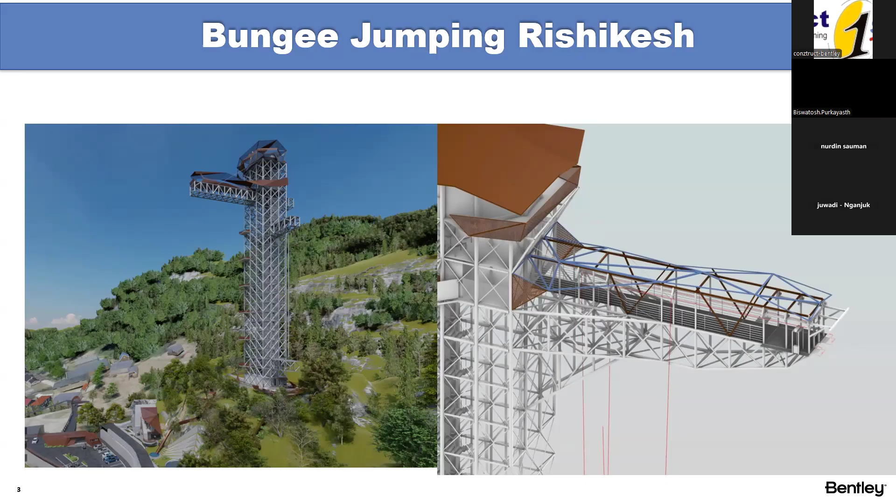So we have so many challenges. Actually we didn't do it directly, but our consultant did, and we always try to advocate and guide them on how to deal with this.

Now you can see here, it's a tall structure having a boom length of around 27 meters, and the drop height is more than 100 meters. It was supposed to withstand extreme climatic conditions.

So our skeleton consultants undertook this project. They used our product, STAAD. Now when I say STAAD, it's not only about STAAD, it's with the Structural WorkSuite. What is that? I'll come to that a bit later.

So what did it do? It's mostly steel. You can see some of the bases here - these are small little foundations or stubby columns. But as I mentioned, it's a super tall structure subjected to extreme climatic conditions, including extreme wind load. So it was modeled with normal steel structure and with pre-tension cable.

And in this boom, this hoisting or mounting passenger cabin was supposed to move around. So a lot of things were considered. First of all, advanced cable analysis was performed. In addition, moving load, which moves all across this portion, was also modeled. Okay, so this is just a project overview.

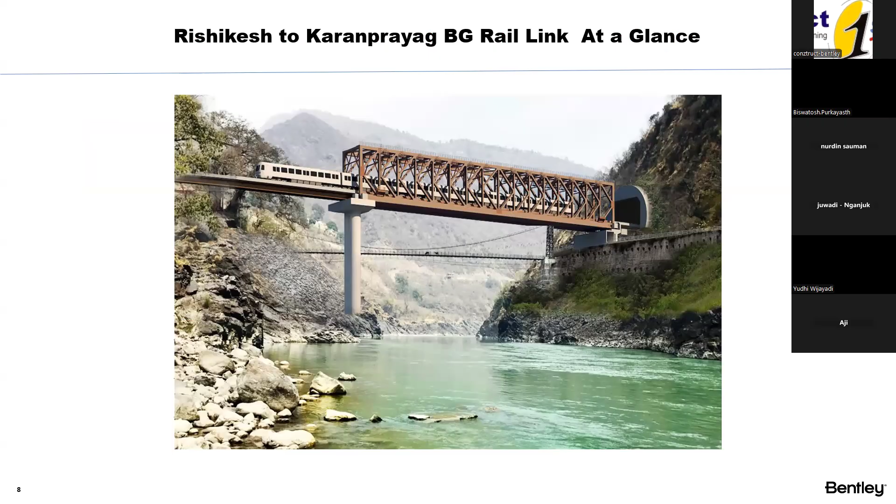So we instead have something called scenario optioneering, by which there could be different types of arrangement for a bridge or any kind of building. Now what you do is open different models separately, analyze them separately, and compare them to see which one would be the most optimum.

So you might be wondering, instead there is something called run cloud analysis. Have you ever come across this? Did you see while you open STAAD, normal analysis, there is something called cloud analysis? Now, cloud analysis is a kind of dedicated analysis. We need to have a separate service for this.

The benefit here is you can run multiple types of geometric arrangement, and you needn't perform the parallel computing in your own machine. In the cloud, you can ask for multi-parallel computation, and you can get all the different design parameters like utilization ratio, steel takeoff, and so on, so that eventually you can compare them and see which one would be best suited for you.

But this is kind of a separate service you need to take. They have used this for different optioneering scenarios, because there could be different kinds of arrangements. So yes, in the cloud, it would be a much smarter and faster way to quickly select the most optimum one.

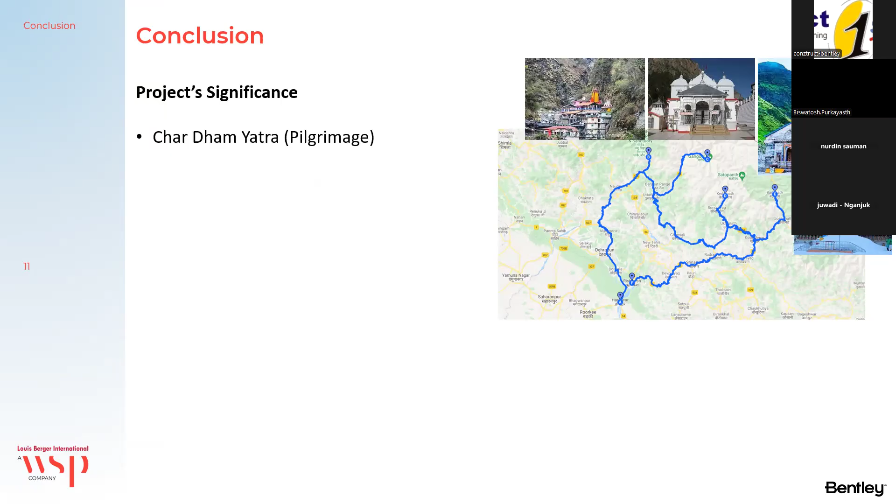It's not like we are selecting some heavy sections and we are done with this. It has to be saving a lot of resources. So yes, these are the project outcomes. If you go to even Google Maps, you can see this is a very rugged terrain, beautiful site though. But yes, building the train track is a very challenging task.

So yes, we have a different set of train tracks built over there, and it helped provide a lot of employment to the local community, as you can see. So yes, how we achieve this optimized design by STAAD, saving significant man hours, critical assessment in the construction stage by incremental launching - this is the project outcome that we have.

And this is one of the biggest success stories. If you go to our Bentley website, you can also see there we have a lot of detailed discussion on this, because this is one of the winners among our projects.

So anyway, let's go into our structural part. So right now we call it the structural work suite. So how many of you have heard of this structural work suite, by the way, or are using the structural work suite? Anyone?

Structural work suite - are you using it, sir? Or at any point of time have you come across it? What is it? Is it a product? Is it a solution? Is it a license? What is it? Anyone?

So every one of you have heard of STAAD Pro, right? At any point of time, even if you have not used it, you have heard of STAAD, right? STAAD is a kind of, we all know that it's a structural analysis and design product. But let's see what we can do.

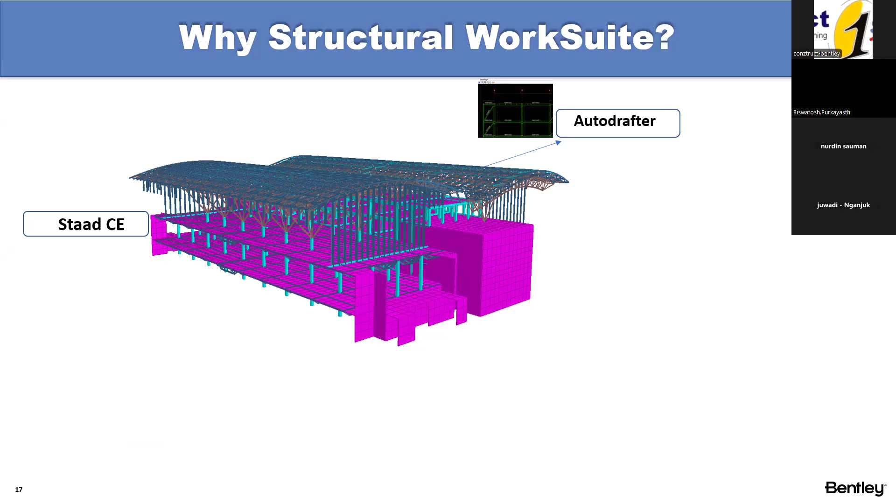So we are done with the steel member design and detailing. What next? Member design is done - is that enough for your steel structure? We need to establish connection design, right? We are good with the member design, but what if the connection fails? That is the reason we need to have some solution for connection design, and we have something called RAM Connection here.

So yes, steel part is almost done. Next, concrete, right? Now for concrete, I have a question for you. How are you dealing with it in STAAD? Because this is a very tricky question - in every session or webinar or seminar I go to, they have a lot of questions about which approach they should use. So is anyone using STAAD for concrete design, by the way? No one? Detailing of the concrete? No, designing.

Detailing will come later on. For designing, we are often using STAAD Pro for building concrete, along with RCDC, Advanced Concrete Design. Then the design which is already inbuilt in STAAD - concrete design, like design column, design beam. Okay, that's a good part.

There is a discussion on this, so I'll just explain - there's a reason I've asked this question, and this is not my question. I have been going to so many places and every user asks this tricky question. I'll come to that, why I've asked this question.

We have something called RCDC or Advanced Concrete Design. If you're in an industrial structure, this will not be that effective for things like pipe racks. If you're in a building structure, it would be very effective. Why is it so? I'm coming to that. For flat slab, post-tension slab, normal slab, hybrid slab, we have RAM Concept, and finally STAAD Foundation.

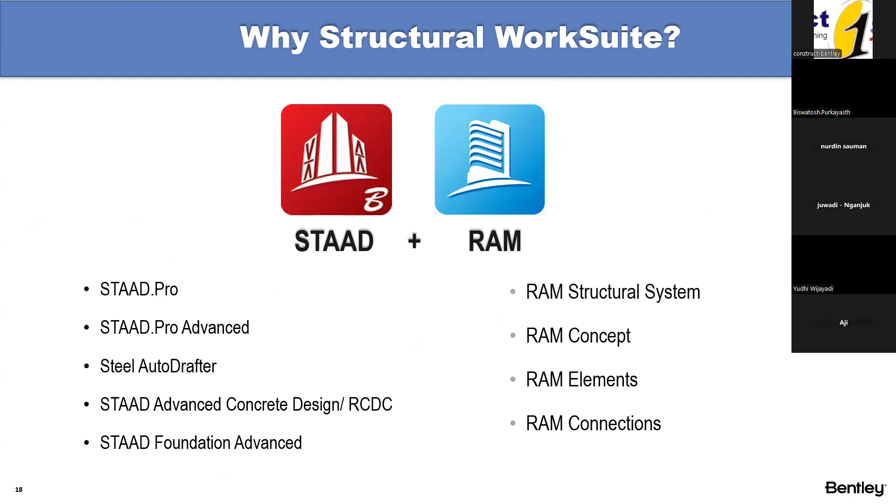So under Structural Work Suite we have this set of programs - many structural solutions apart from STAAD. You'll get all of them under this single license. Any question? Okay.

Those who are new to STAAD, let me give you some differentiators. First of all, it's a time-tested product, not something developed overnight - it's been around for 24, 25 years. It has got the input editor. I think everyone is aware of this, right? Input editor in STAAD - if not, let me give you some idea.

Input editor is another approach to control different modeling or analysis instructions through command prompts and different syntax. For example, if you want to apply a partial moment release to a set of members, you needn't select the members graphically. You can select the member from the input editor, define the member number, and define something like MP 0.99 or 0.95, and everything will be automatically assigned to all the defined members.

Not yet - you've heard of it, right? Did you ever hear of OpenSTAAD? Never used it, right? If you want any separate training on OpenSTAAD, please let me know. I also work a little bit on OpenSTAAD because it's more about programming.

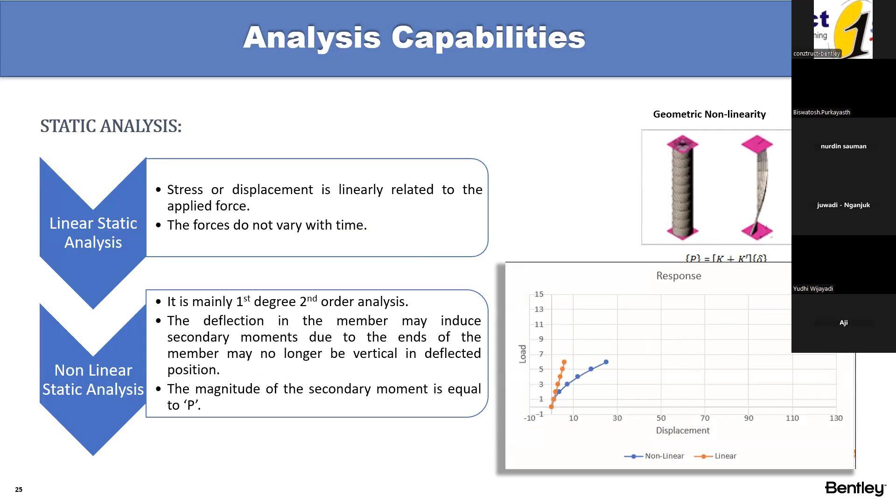If you're doing dynamic analysis, we have different options like response spectrum and time history. Response spectrum is mostly for seismic precision design, which is a code-based approach. For dynamic analysis, we handle different scenarios - it could be forced, unforced, periodic, or non-periodic.

For example, you want to do machine foundation analysis, blast analysis, earthquake analysis, footfall analysis, and so on. There are different types of solvers we have to attain all those different requirements. So this is the summary of the analysis capabilities.

Now, in your day-to-day life, which type of analysis do you need? Just let me know - in your structure or in your project.

Nonlinear? Geometric nonlinear, right? And how about the dynamic analysis? Okay, now nonlinear, someone mentioned, right? So what type of nonlinear? It's a P-delta analysis, large deformation. Yes, that's nonlinear, right?

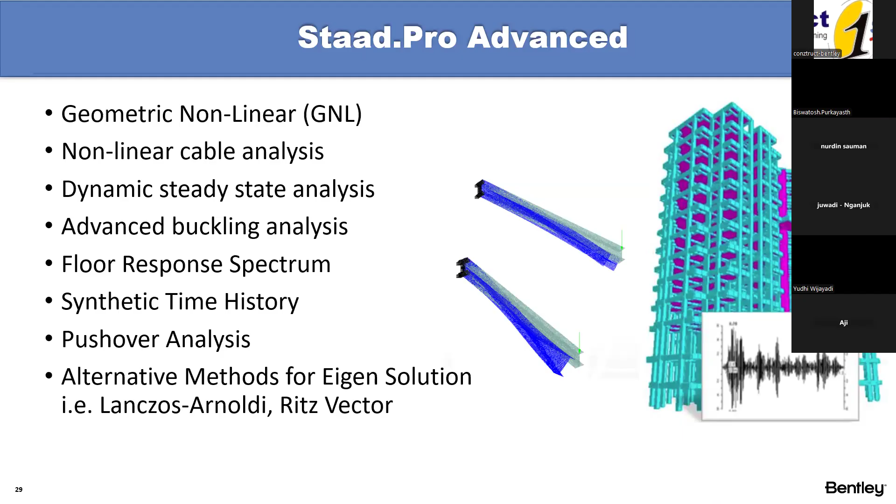So who has installed the latest one? I think some of you have installed 2023, right? So everyone has 2023?

No? Okay. Now, if you go to some old YouTube videos, a lot of YouTubers will show you with V8i. V8i is a much older version. Right now, from 2020 onwards, we have migrated to Connect Edition and then 2024. A lot of changes have been made.

So anyway, Connect Edition and all, most of you are aware of. Just to give you a quick differentiator here, it's a physical modeler-based approach, and the solver is a 64-bit solver. It has integration with ADINA, and all the international design codes are available. It has the steel auto-drafter, steel connection design, and advanced concrete design. There are a lot of other differentiators apart from that.

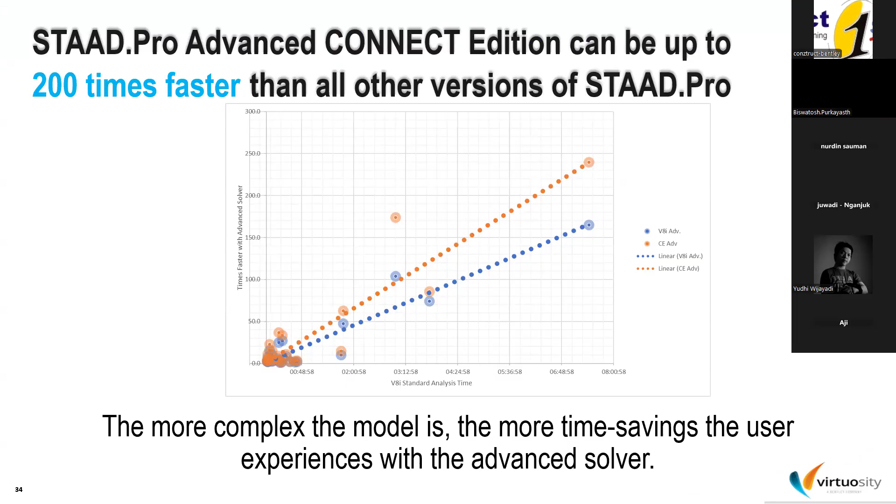iTwin Synchronizer is what we have - like BIM integration and all. This is the platform through which you can integrate with other products like Revit, Tekla Structures, and so on. Maybe after the end of this session, I can show a small video on this. But this is not a software, it's a small in-house application based on what we call digital twin, by which we can integrate between different products.

We can pull information - not only loading information or the sketch, but a lot of information like section sizes, material properties, release conditions, and so many other things. This is the interface connecting through the iTwin platform with STAAD, Open Building Designer, Revit Structure, SACS, AutoPipe, RAM Structural System, ProStructure, ProSteel, and so on. If you want to take a snapshot, you can take it.

Let me give you a quick workflow demonstration on this. So if you have open STAAD Pro, did you try this iTwin Synchronizer in STAAD? You have tried. From which product, import or export? Not analytical, meaning which other products like ProStructure, SACS, Revit? Only STAAD Pro to Revit. You have tried, right? Okay, fine.

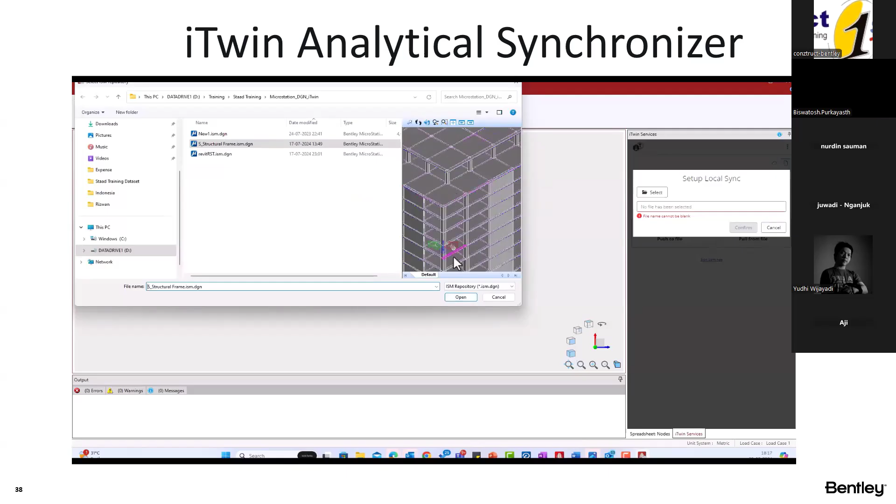For example, this is an Open Building Designer model, an architectural drawing, and I think this light is too strong. We can import the building. Let me just pull this a little bit. So you can see that this is an architectural drawing, right? This could be your building or industrial structure, anything.

I'm just showing it on this normal building structure, and it's a finite element model. Now this model, you can visualize, you can see everything in this iTwin Synchronizer, and you can just include or exclude any of the information you want to discard. This skyway view is very effective to quickly see if there is any clash or any kind of overlap, everything you can just visualize properly.

Once you are happy with that, after putting in that information, you can import it in STAAD Pro Physical Modeler. This is the physical modeler, and here you can see we have imported it, and it consists of all finite element information like meshing and everything. Let me just drag it a little bit, just to show you the mesh. It's a kind of very fine mesh. You can change the mesh density and everything.

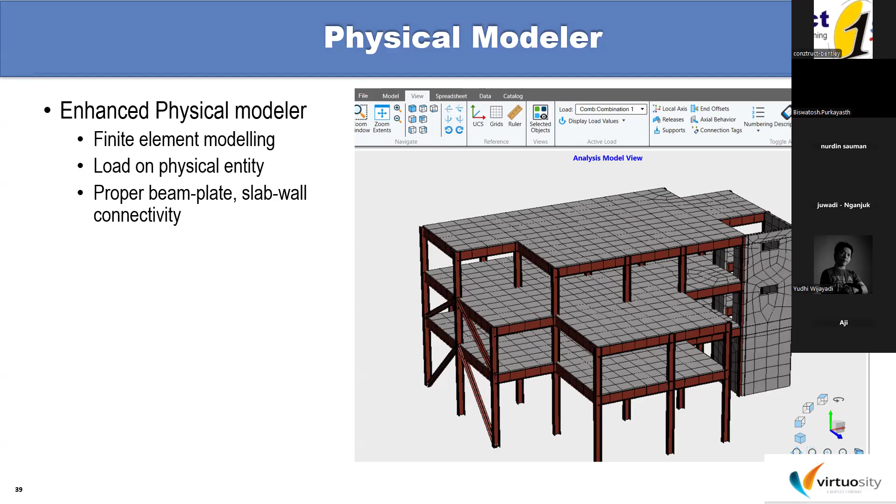So this is the chapter that we are coming to. Physical modeler is a very important feature that we have added in Connect Edition in 2020. Now a lot of users have been working on STAAD, but they don't use the physical modeler. Yes, it's absolutely optional, meaning you didn't have to use it, but it can help you to enhance your experience in modeling. So what exactly is the physical modeler? Let's see.

So this is the model we really see in our real life scenario. For example, this table, can we see any meshing, any nodes? Nothing. We see very continuous solid elements, right? Solid means a simple single element. But for the software, they don't use this one. They will need some analytical information like meshing, nodal information, connectivity information, and a lot of other things.

The point is, if we use the meshing in the normal approach, we can do it in the normal analytical modeler, but there are a lot of different meshing standards and quality we need to ensure. First of all, the connectivity issues, mesh quality, it should have a very good aspect ratio, and all those connectivity and quality issues will take a lot of time for an engineer to generate this. So that is the reason if you model it in a platform where you just need to define, for example, this table, I can define all the 4 corner nodes and thickness. And if there is any column or beam, the program would internally generate and establish the connection. How about it? It would be a wonderful experience, right?

So we can model it in how we see it in the physical sense. That's the reason we call it the physical modeler. It will generate the analytical modeler like this. You can see all those meshed footings generated in the analytical modeler. You also know that in the analytical modeler we have mat foundation, plate mat and so on, plate mesh, everything we can do there, but you can leverage the power of the physical modeler for quickly modeling this.

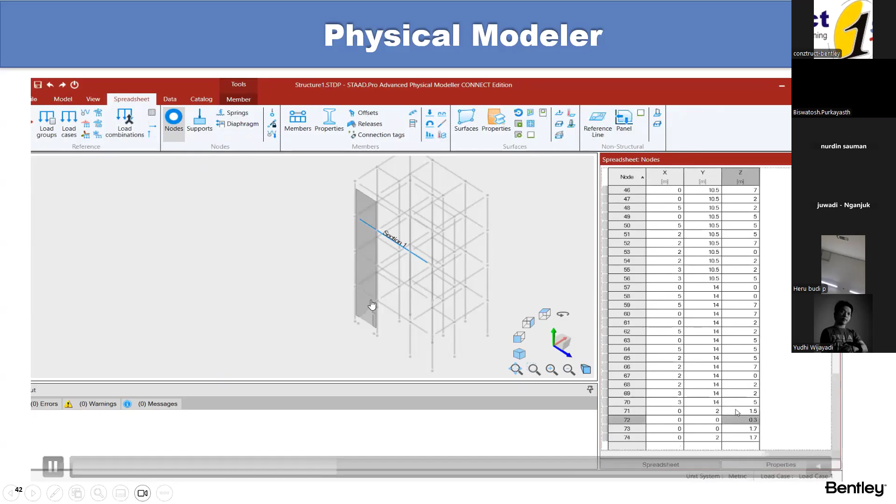For example, here this is a building, and we have some opening. This is modeled in the physical modeler. All of a sudden, imagine my client says, change the shape of this opening from rectangle to triangle. Now if I had already meshed it the normal way like in the analytical modeler, I would have to delete everything. But instead, we can go back to our table in the physical modeler, change the basic dimension, just the corner dimension, and reduce it to a triangle - triangle isn't practical, but just for this explanation I've shown this.

And if I come to the analytical modeler, you can see the mesh and everything is automatically adjusted. So I didn't have to delete anything, I didn't have to recreate anything. That's the beauty of the physical modeler, especially if you're working with a fine mesh model. Any question?

Can we set the mesh, not the parametric model, but square meshing? Square meshing here? Yes - not square exactly, these are all quadrilateral, and wherever required you can see small little squares are created. It's not square, it's quadrilateral meshing. Because this is a triangle, right? If I have to model it as a square, at certain points it has to change its orientation and insert some triangles. That's why it automatically reorients and adjusts. So why do you need the square or rectangular meshing? For designing? Yes, for designing it within STAAD Pro. Yes, I know this is the common reason, and that's why you didn't have to do that.

I'll show how you would design this with a square. First of all, obviously you're not going to make any triangle here, but if it is a rectangle, then obviously the program would automatically create it.

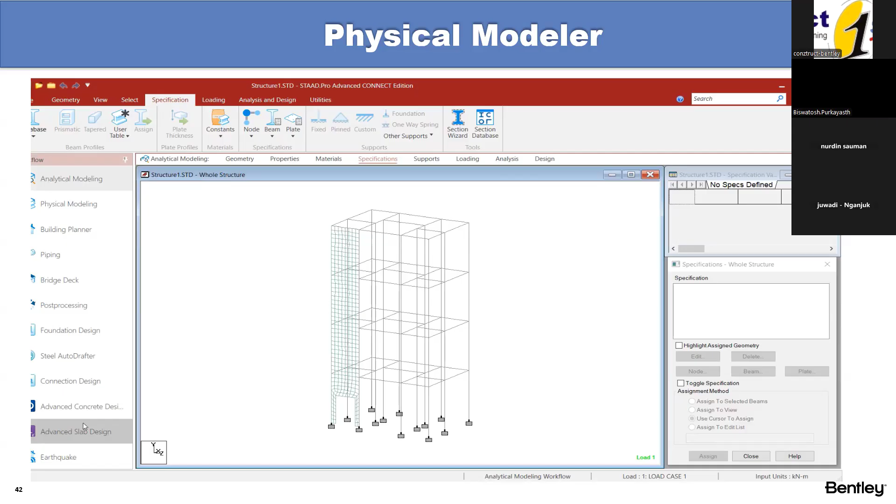Next, before I go into that, we have seismic options for the building industry. We have response spectrum and time history analysis capabilities. STAAD is a very big chapter, and in 3 hours it's difficult to cover every detail, so just know that we have a very advanced response spectrum analysis feature and time history analysis by which you can simulate any kind of dynamic behavior of the structure.

Calculation of base shear in STAAD is a common question. You can take a snapshot because you won't find it in our help manual. A lot of users come back saying their base shear is not matching their expectation. You need to see that these 4 parameters are properly calculated, then you can assert it. Take this snapshot because it's very helpful for dynamic analysis of the building. When I was in support, many users doing building analysis found the base shear is 0. Why? We noticed that mass participation might be very small, and spectral acceleration for that mode is very low. So we need to check that all these factors are within the expected range.

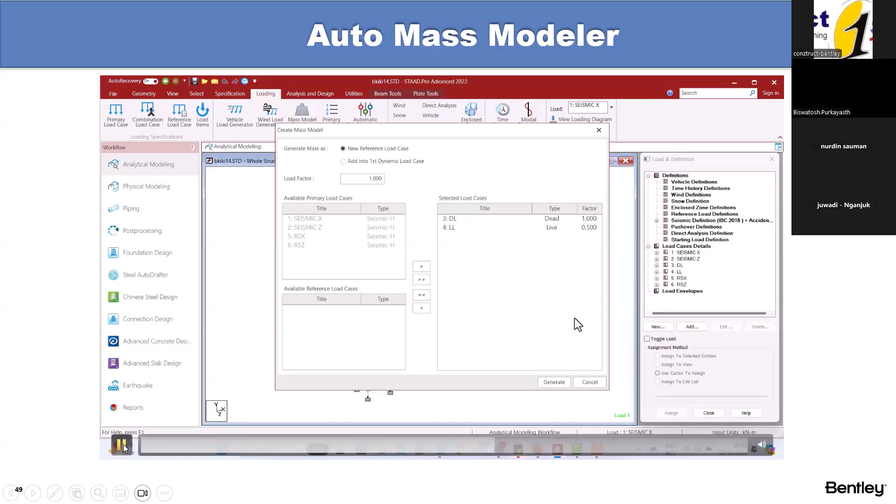You can see on the right side, everything was automatically created by the program. I've taken a very small model for this, but if it's a huge model, it will take a long time if you go by the normal procedure.

Some advanced dynamic analysis — Ritz analysis. I'm not going into detailed discussion of this, but just asking, are you using this in any other software? In your industrial structures, if you're doing dynamic analysis, you might need to use it in some cases. This would be very helpful, especially for pipelines and similar structures if you're doing dynamic analysis.

Say, for example, there is a normal building, and you have modeled some mounting structure here, maybe for a stand, modeling pipes or a steel antenna and things like this. Now what happens if the structure is very complex? There are some elements that are not as stiff compared to the main structure. When you vibrate it, those antennas will flutter just like a flag on a pole. You might wonder, I'm doing the dynamic analysis and can't remove it, but you might want to model it as part of, for example, a mezzanine floor. Now your entire structure is very stiff, but that connected component is not as stiff.

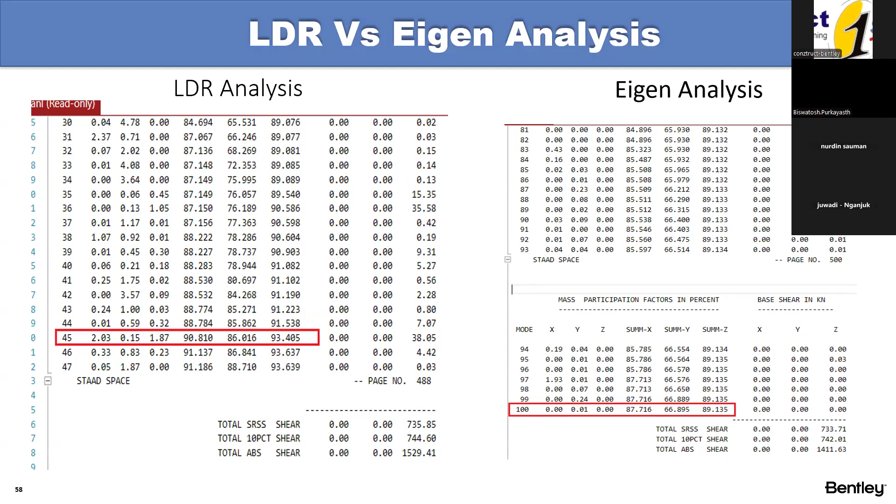So this is just to tell you, this is not a class on dynamics or anything, because we have to cover a lot of things, just to give you a differentiating feature. If you have any question, you can ask me.

Response spectrum. Anyone of you aware of this? Do you want me to discuss this a little bit? Do you need to use it? Why? By the way, any other software, do you have this response spectrum? By the way, you have it, right? Now he has worked on this.

So what happens? Just to give you some idea, in the response spectrum analysis, after you perform the eigen solution for every mode you are solving, we get the eigen frequency and everything. Now, responses of every mode are fetched from this response spectrum curve, depending on the natural time period of that particular mode.

Now, there is something called combination method, CQC method, SRSS method. These are basically something like this, if I want to show something. The resultant would be R1 square plus R2 square plus R3 square. CQC also has some expression where square is involved. R means the responses, it could be reaction, it could be displacement, it could be forces.

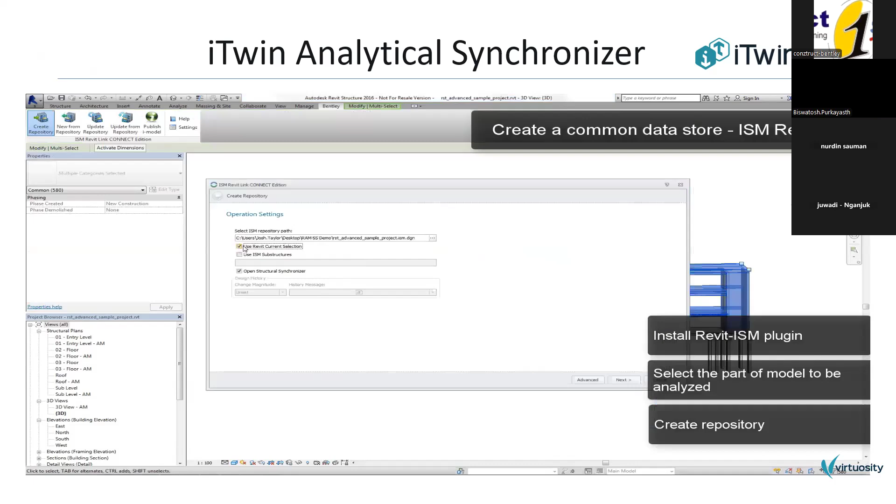But the interface, once we bring it into ISM, from there on we do have control. Previously I did have Revit, but after all we didn't have any Autodesk license, so we had to follow IT instructions. This is for RAM structural system. Let me see if I have something similar on STAAD.

If it is STAAD, let me see. Yeah, I think it is on STAAD. Let me show you the workflow and see if it's sufficing your requirement or not. This is Autodesk Revit, okay? I can share this video with you - at this point you can further revisit this entire process. So let me play this.

It's a long process, I'll skip it a little bit. It's a Revit interface - you can see all those joints and everything you're asking about. You can find it in this video. As I don't have Revit, I can't open it and show you, but I have recorded it before. Every step is recorded here.

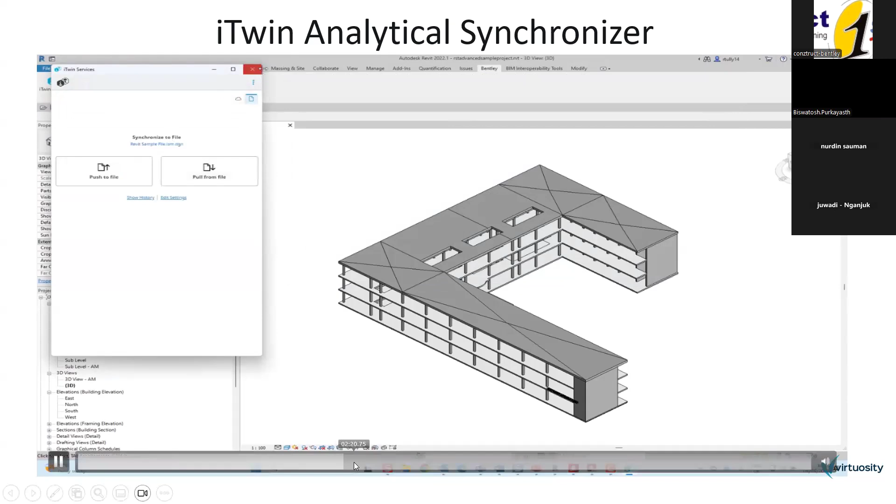Long videos, yeah. This is iTwin in STAAD. This is how we have imported it in STAAD.Pro in the physical model. In the physical modeler, you can make changes like mesh density and everything. Further, you can take it - there also you can make some changes in this ISM modeler. A lot of things - if you want to discard or include something, you can do this.

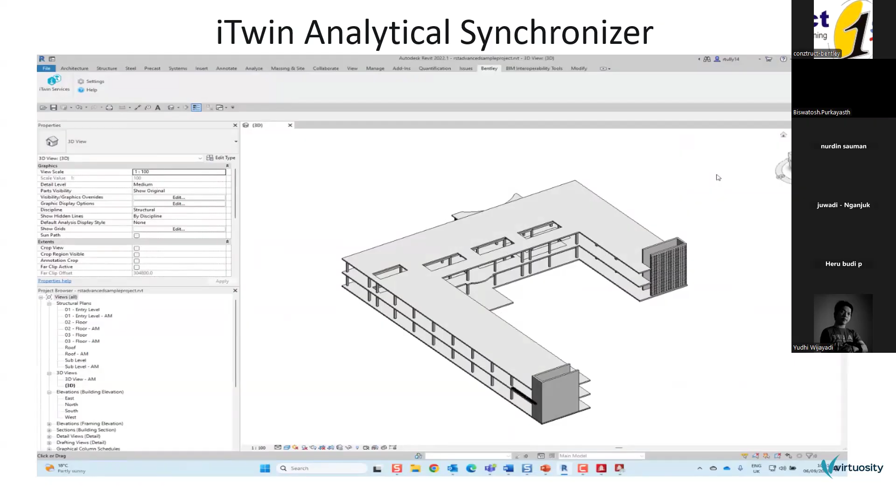It's a long video, around 5 minutes, the entire process we have discussed. Maybe I can share it so you can see each and every step, which may give you some better insight. So this is the entire work. I have also shown that if you want to make changes in STAAD and again take it to Revit, you can also do it. So it's two-way traffic. Please remind me after this, I will share these kinds of things.

There is another example I had from Revit to STAAD. We had a Revit license, after that we discarded the Autodesk license because of some IT compliance. Okay, I'll share this information with you. You can get all the information.

Okay, now can you take a break? Then we'll come with some live model presentation, maybe quickly with the building and then the steel. Okay, how much time do we have? 1.5 hours, can it be?

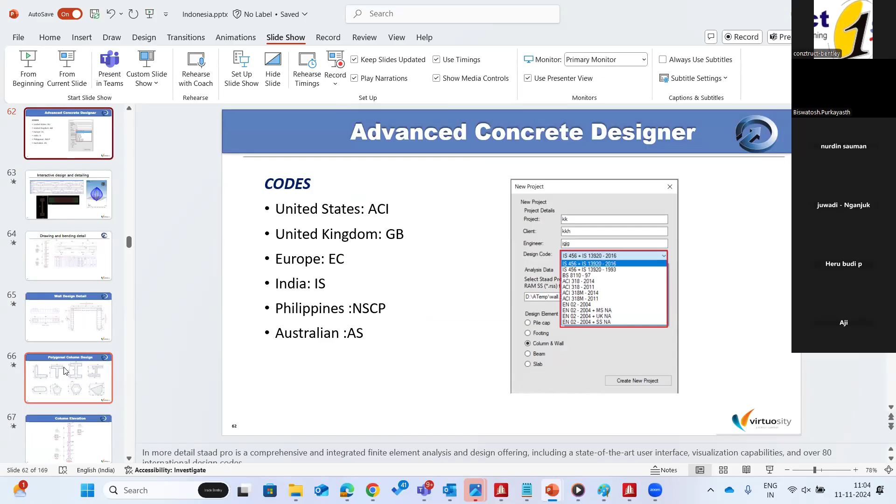No, after that, let me finish this. And just call it start.

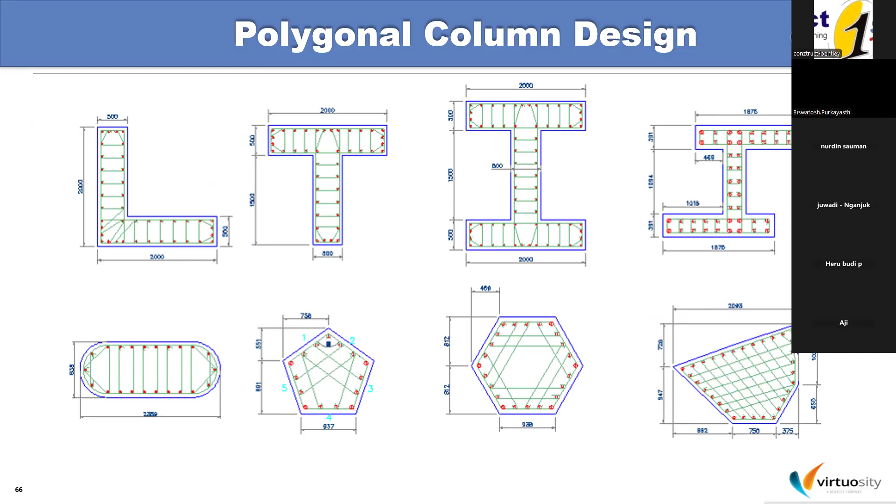And this is the column design, you can see the detailing. Believe me, these detailings are very rich, maintaining the proper lap length, height, distance, spacing, all those zones, everything is well detailed. Even for the beam, you can see the detailing after designing, very rich.

I think why can't we hide this? I don't know. Or how to hide this.

Anyway, this is a bar bending schedule. This is also a very painful task. After you design, you need to generate the bar bending schedule like cutting length and all, right? So we have this product which will also generate the bar bending schedule, including the cutting length and all. Those who are from the concrete industry, especially building, will find it very useful.

Slab and staircase, we can design. And the reports and BOQ, the bill of quantities.

Okay, now let me open a quick model for you. Let me see if I can have this. For steel structures, I'll come later after this.

So this is in STAAD, right? Now, someone has asked the question that they have used a physical modeler, and while they have come to the analytical modeler, you got some error message. I don't know the error message that you got. First of all, let me discuss this, then I will come to that. Just hold on.

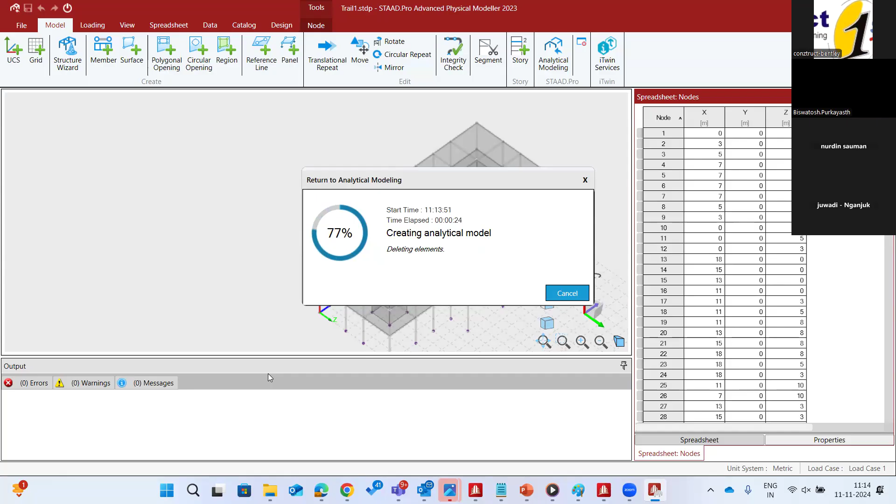If I go to analytical modeler, hold on.

So you can see this time I have reduced my mesh. As mentioned, structured mesh will, if our core location is good, form a well shape.

Now, in many situations, if you come back to the analytical modeler and want to make changes from here, you can see something is grayed out. You can't add anything, so don't get panicked here. Okay.

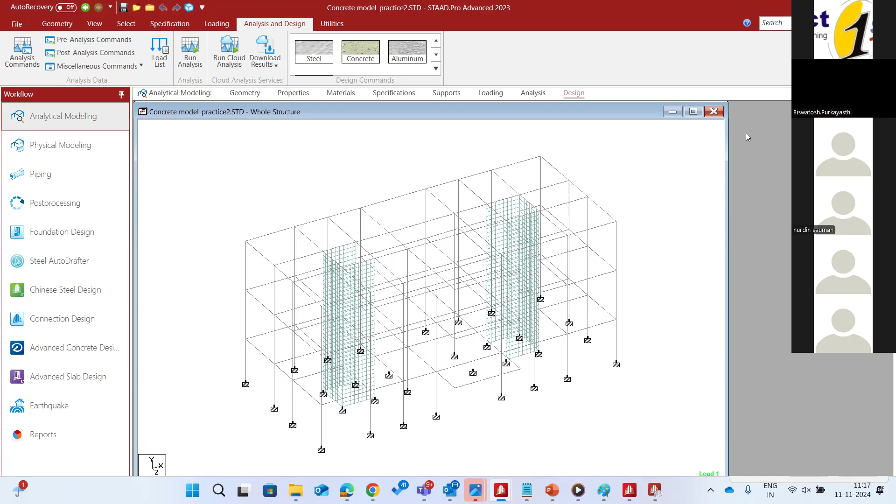we show this while you generate a mesh from here. I'm not going to add, I want to tamper this.

Or else you would find it kind of difficult making RCDC recognize this vertical wall as a shear wall, and you would wonder why RCDC could not identify those shear walls. The reason being, either if you're working directly in the analytical model, all defined as a shear wall.

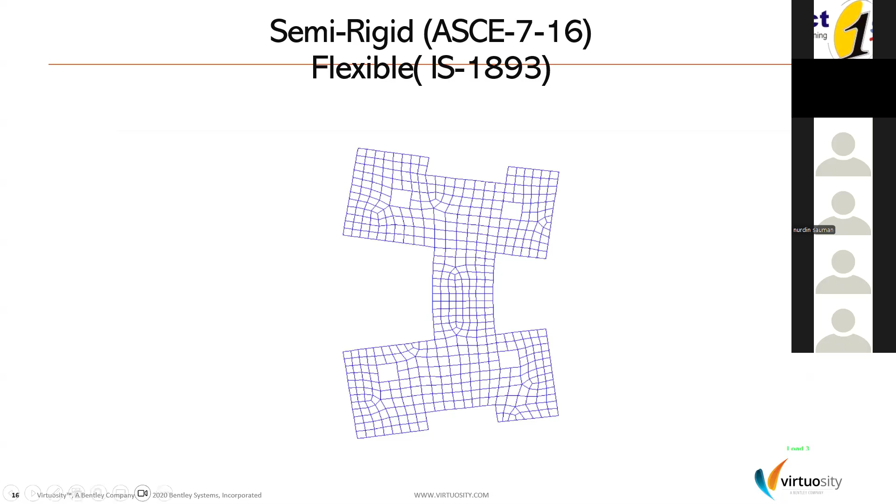There are some kinds of demonstrations or specifications they have defined for flexible diaphragms, which doesn't have any setback, and some span-to-depth ratio. There's some kind of guideline.

If there's no horizontal irregularity, there's another condition, and you need to just make sure that the maximum deflection should not be more than 2 times the average. Then only can you consider it a rigid diaphragm per code, and accordingly determine whether it falls into rigid or not rigid diaphragm category.

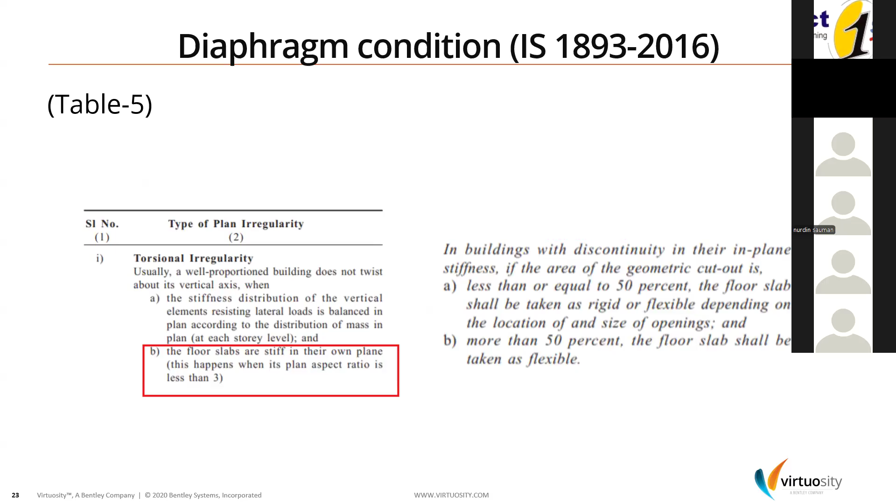I'm stuck right now. Another reason would be this one: you can see this open structure. You can't use a rigid floor diaphragm here, because this will undergo in-plane deformation.

Even if there is a cutout which has significant span, you should use it carefully, since it can undergo in-plane deformation. Also, another disadvantage is if there is a bracing like this, you can't get any forces in these horizontal bracings. And if it is a transfer condition, that means the load is directly falling on the slab, not on the column -- so obviously, how do you distribute the load?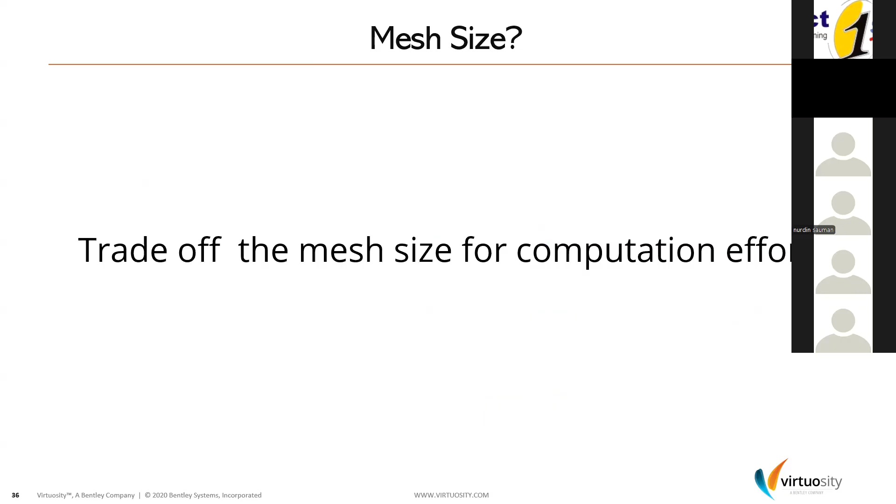So in a nutshell, the million dollar question is, shall I go for a rigid diaphragm or not? And to understand that, the meshing -- if you are not defining the rigid diaphragm, that means you have to use the plate element and mesh it, which needs a huge computational effort.

So the conclusion is, the semi-rigid diaphragm is the realistic and most accurate way to capture the behavior of any diaphragm, irrespective of requirement. On the other hand, rigid and flexible diaphragms are two extreme conditions which are assumed to be faster and numerically stable for computation performance. So eventually, use your engineering judgment by assessing the benefit and the effort involved in modeling, and the analysis time, to determine when it qualifies for rigid or semi-rigid.

There's a detailed webinar on this -- I've just gone through the overview, some case studies, and some modeling I've already discussed. I can send you the link if you want. So depending on that, you can model it without elements.

Also note, please, that if it's for that, as I have not modeled the physical slab here, I define the diaphragm by defining the diaphragm height. I just define the height of the floor. The diaphragm has been assigned here, at all those levels.

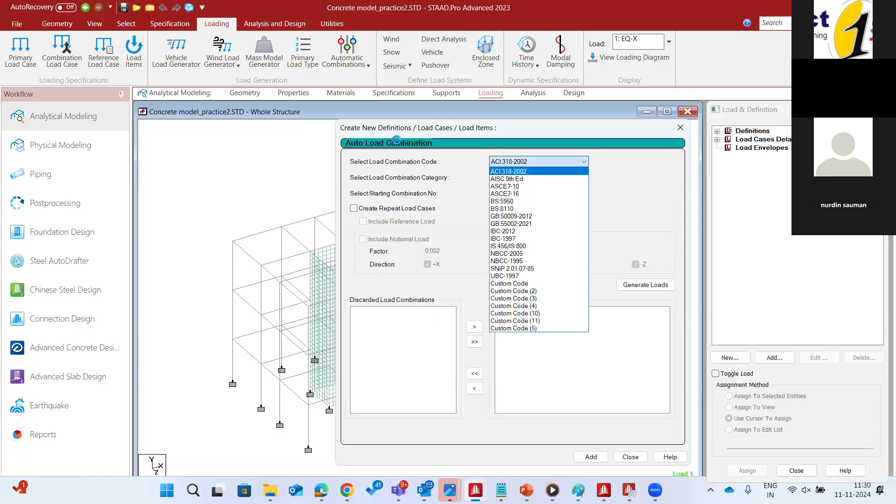Next time, whenever you use load combination, custom codes should be generated. So if you want to generate something, you can see 1.7. All those factors that you have generated, the template will be available. Can you please show the code? This combination load can...

Because this is a very powerful feature, a lot of things, as we have mass modeler, automated load combination generator can enhance your quick modeling workflow. Say, for example, you are working with 10 primary load cases, it could be like you have 50 combinations. There's a lot of chance that you might manually mistake defining the vectors, sign convention, and it is a bit time consuming.

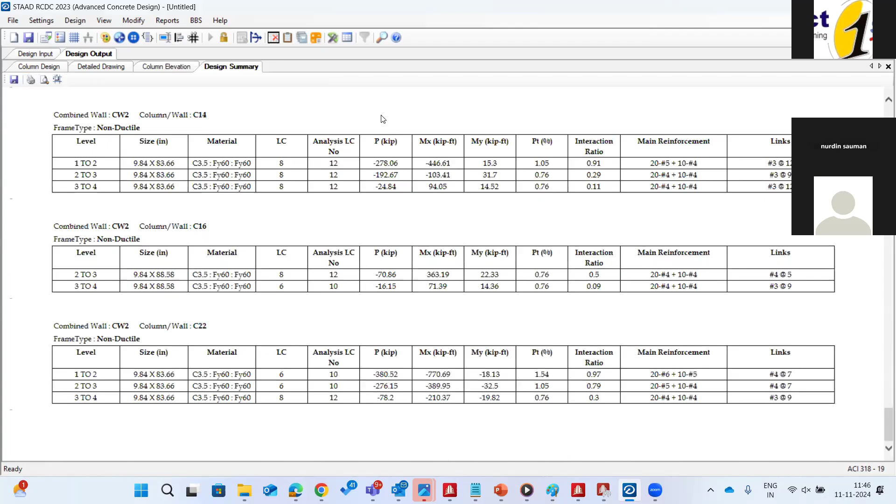And then design summary, the complete calculation if you want. Then if you want the detailed calculation, I'm not firing all of them, it will take a lot of time to generate those pages. Better I open one of them.

Okay, and finally, you can see the failure diagnostic. If any of the members are failed, you can see reason would be shown. The clauses, if there is any, it will report you. Bar bending schedule is also a very powerful feature we have. You can do all the detailing and drawing settings, like what things you want to include in this drawing and everything, very detailed product for design and detailing.

Even for, believe me, this RCDC can also open the ETABS file before we acquired it, because it was used by ETABS users and STAAD users also, because of this designing detail. Right now, I think ETABS is no longer supported. This is the bar bending schedules and cutting length and all.

Okay, so this is just a quick overview of RCDC, and similar way you can do the same for beam design. One thing just to add, even if you're doing the beam design, even if you are modeling with plate elements, if those beams are broken, you can still design them. Sure, right. Okay.

So this is the one. Now let me go to steel design, okay? Quickly, because I have another half an hour. Break at 12 o'clock, okay, give me another half an hour. A big subject, how can I cover all those things in this limited time? If I want to discuss some of the interesting parts, it will take a full day session. One full hour for concrete. Even one full hour is not enough, because RCDC will take another four hours. So anyway, it depends on the discussion depth we need.

Okay, in steel it's very interesting though. By the way, is anyone of you using partial moment release? Yes, you're using it. You too, obviously, partial moment release. So any axis, partial moment value, that is. Normally in the longitudinal direction we will release. All full release or partial moment release? Full release, or you don't use the partial moment release? I agree, okay, okay, I'll come to a few of these things.

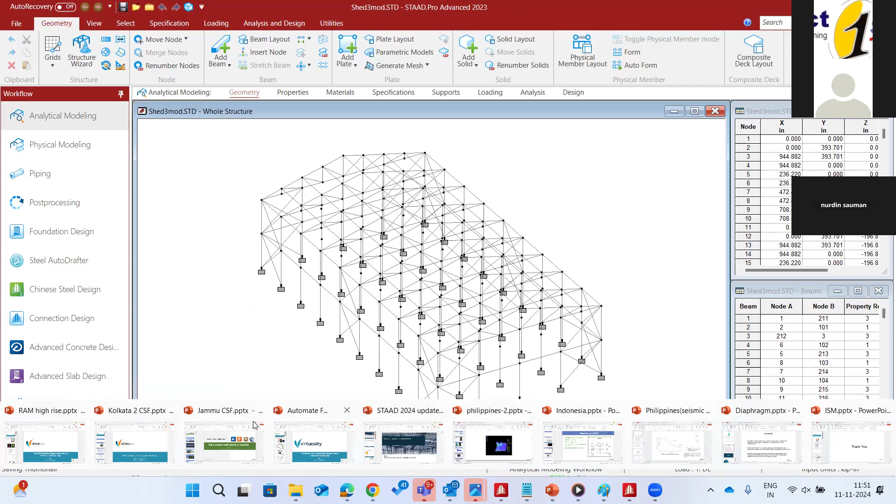Steel, none of you - sorry, one. How many of you are using the steel structure? Okay, let me open one list then. Just I'm touching upon a few of the important things.

So your steel section could be of different types. It could be built up, it could be cold formed, it could be any arbitrary shape. In 2020-24, we have replaced this section wizard with the shape editor. Are you aware of this, by the way? Tapered section - these are some of the arbitrary sections.

Now let me go through a few of the things. So it could be a very simple hot roll section or any build-up section made with the hot roll. It could be a build-up from plate elements like web tapered, or maybe some arbitrary shape which is designed not like a hot roll steel. So all those things are possible to model and perform the analysis, but we need to understand a few of the things before we jump into the conclusion.

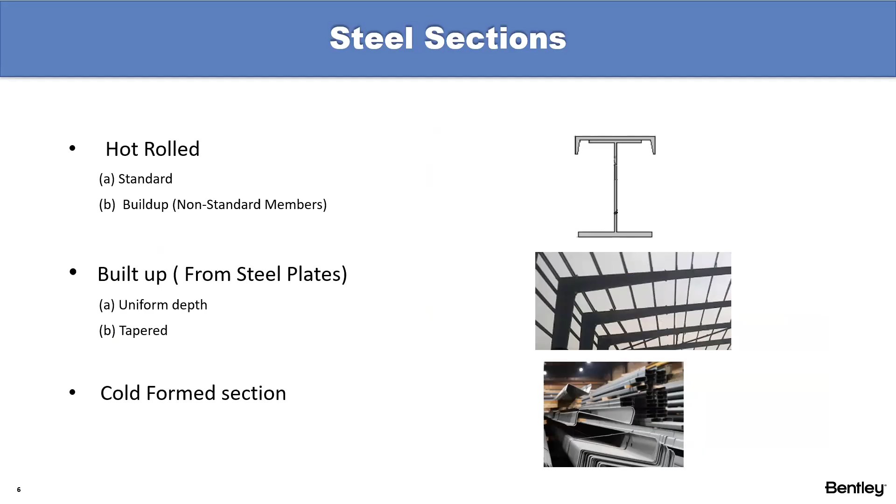Different ways to model the steel section - I'm just still in the steel sections, okay? So those who are into other products, not comparing with other products, every product has got its own unique merits and demerits. Just to let you know, in steel, as we mentioned, we have been here for a long time now. It has got an enormous amount of options to model different shapes. For example, any arbitrary shape you have, for example, this one.

It could be steel or it could be aluminum extrusion, anything, right? There is something called section wizard or shape editor by which you can model any kind of arbitrary shape. If it is in a DXF format, you can import it, you can assign it, and you can analyze it. Anyone of you using this arbitrary section, by the way? No need? Okay, just to let you know, anyway.

And if you're into the factory shed, like where you have the web tapered section, you can model the web tapered section and we can also design them.

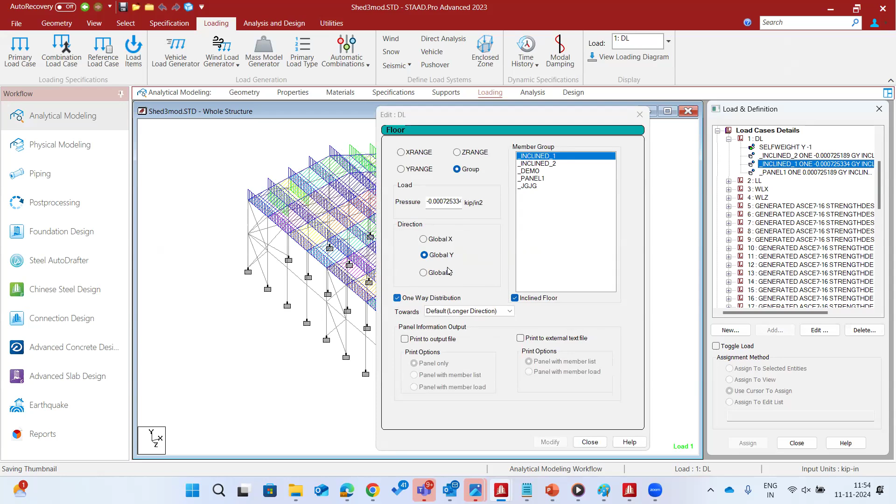Anyway, let me go to now the structure where we are. So this is a simple structure, but we are discussing a few things here - dead load by the group load. We have used a one-way flow load because steel roofing is directly sitting on the purlin, so there is no point in defining the two-way floor load. There is an option called inclined floor and one-way floor, and I have applied the group load. The group option is nothing - you need to define this floor panel by any group name. And while defining the floor load, the group name would be automatically visible. You need to just assign them.

Anyway, we have live load. For wind load, we have a very dedicated feature to define it. We have both features: the normal manual way of defining wind load, and also codal approaches. This is generated by the manual approach, where we define intensity versus height information. Or if you want to select any code, the codal procedure would be used to generate the wind load.

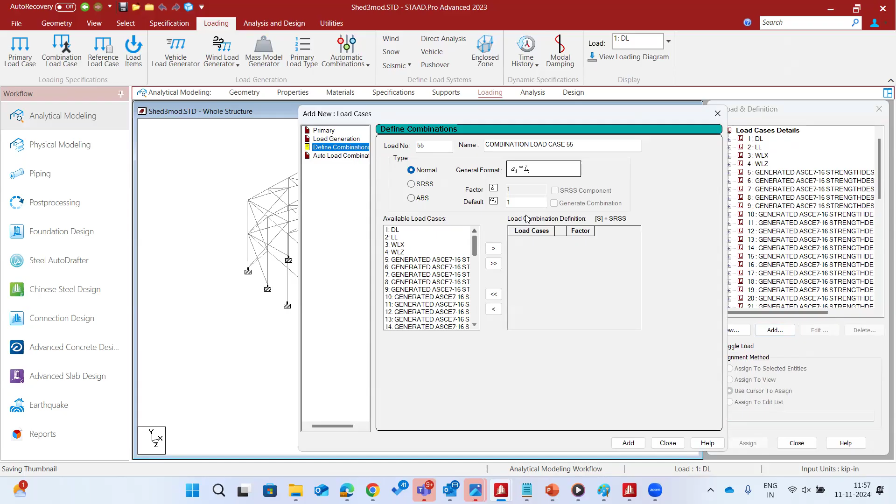Yes, he's close to that, but the point is, if there is any tension only, or compression only, or P-delta, we can't use the load combination directly. The reason being, these are nonlinear states. Tension only, we have to iterate to converge this problem. But if the model has got P-delta analysis, direct analysis, tension only member, compression only member - these are nonlinear analysis. And if we do the load combination, what it does is simply pick up the result from the primary load cases and algebraically sum them up. You get my point? Okay, let me go here.

This is important because in some cases, for example, you are using tension only, or maybe mat foundation. I have seen a lot of users using the normal combination, and they come back to us saying they are getting very misleading results. What to do, I'll come to that later on.

Say, for example, if I have this guy here, and you have applied a load P1, and the displacement may be D1. In a second instance, P2, and displacement is D2. Now, if I want to see the combined effect of P1 plus P2, what would be the displacement of this?

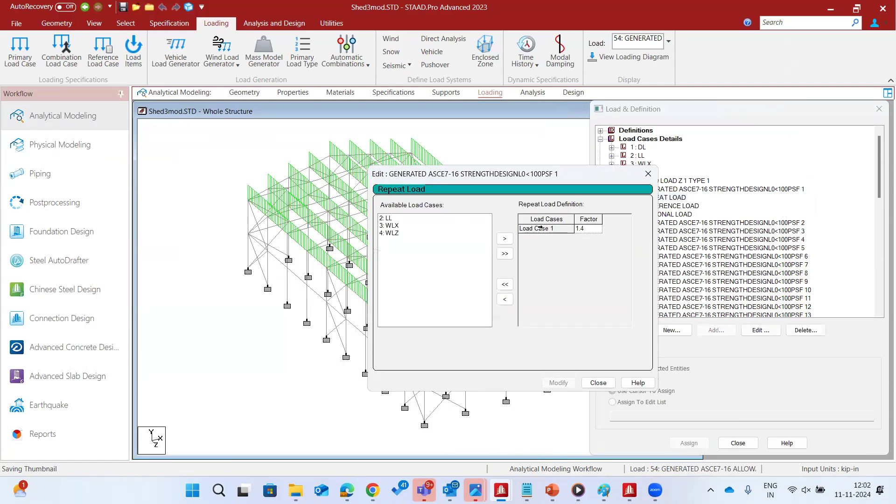Repeat load - as he mentioned, I think he tried to mention this, repeat load. The repeat load is similar to this load combination. There also you can pull the basic load cases, define its factor, but it will create a new load case. That's the reason all the combined effect that you can see here, I have already created them. These are all shown by small letter L rather than C, that means this is basically a load case itself, and within that the combined effects are already included wherever required. So if you use the repeat load case, a new load vector will be created and solved, so even if it is non-linear, you'll get the exact result.

So let me show you a very interesting thing. If I have this, let me see if I can show this. Any question on this, by the way?

Now you should consider this because tension only, compression only, you have to model it at certain point of time, be it member or the soil support. And soil has compression only property, right? So it is again non-linear. Now in a structure, there will be wind load plus gravity load. If you use the normal combination option, your structure might give you a very misleading result.

Let's see this one. This is one of the examples I have taken. So here you can see this is the lateral load, gravity load. And what is the support condition I have defined? Plate mat, compression only spring. Now again, it is a non-linear state.

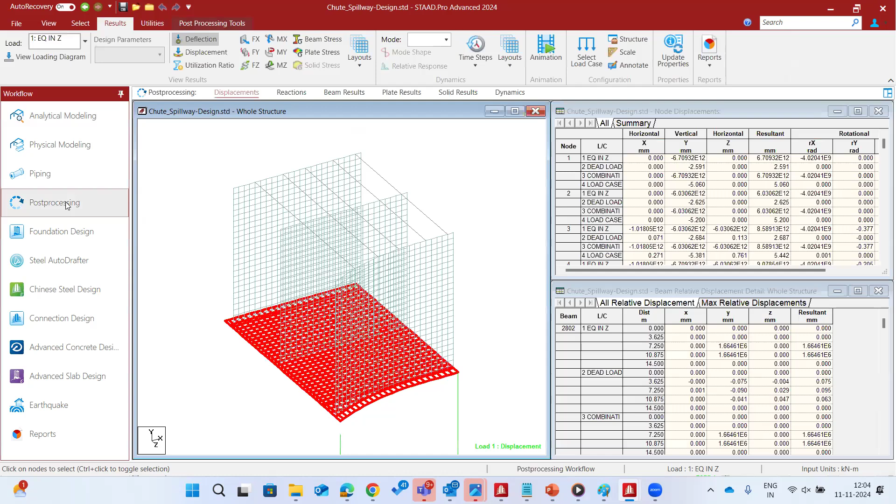Now if I use the normal combination, say for example, if I use the normal combination... I have a terrible bad throat. So you can see the normal combination, I am having the displacement of something infinitely high, e to the power 12. The reason being, there is nothing to stabilize because this is a non-linear state.

As for the first load case, earthquake load, it is like load without any gravity, and I have a compression only spring, meaning something which can only take the compression and can't resist any kind of uplift. Say, for example, a very light, maybe styrofoam-like thing, if you apply the wind it will topple like this, because there is nothing to stabilize it, no gravity load. It has got a gravity load, but imagine there is no gravity load, it will topple like this, right?

That is the reason for the first load case, you are getting unexpectedly high displacement. It's fine, we are not working with the primary load case, we are working with the combined effect. For the gravity load, it's fine. But whenever we are using the combined effect, still we are getting so much of high displacement, which should not happen. The reason being, it is a misleading result because it algebraically adds both the results. Okay, now let's see how to overcome this.

We have used this one, the fourth one, as a repeat load case, where we have used the same first two load cases. We have pulled together whatever factors we want to include, and we have performed this analysis. Now in the repeat load case, you can see that we are getting a very decent result, because it is actually solving the combined effect by creating a new load vector rather than blindly taking those primary load responses and algebraically solving them. So remember this - if you design with the normal combination, maybe you are getting a lot of misleading results for this. Anyway.

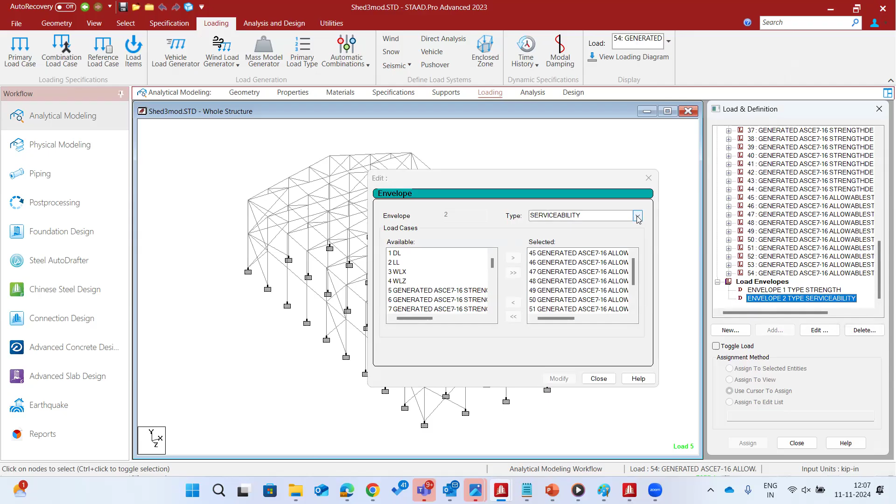And please note that we have the load envelope, I don't know if you are using it or not. There is a very good feature in STAAD, even if you are in industrial structure it is very required - that within the same parameter block, you can ask for both the serviceability and the strength limit state check. What you need to do is define this envelope definition. These are the load cases for the strength limit state, and these are the load combinations for the serviceability limit state. Because in the serviceability limit state, you are not factoring, mostly. So you can ask the program to include this, and once you've done it, the program would automatically check both states.

Now I have performed the analysis. Time is limited, or else I could have explained a little bit more on this partial moment. If you have any question on partial moment, please, you may ask. Okay, now let's perform the analysis.

So steel designing in progress. Now, in the steel design, you can see something like effective length factor, which we have included in the 2023 version. Anyone can say what it is for, or has anyone used this before? Effective length factor.

If you're in steel design at a certain point of time, you very sure need this. LY, LZ, or you can say the factor is KY, KZ. So what factor do you take? Default member length, or the KY value of 1? Or you calculate it, considering the distance between, say, columns.

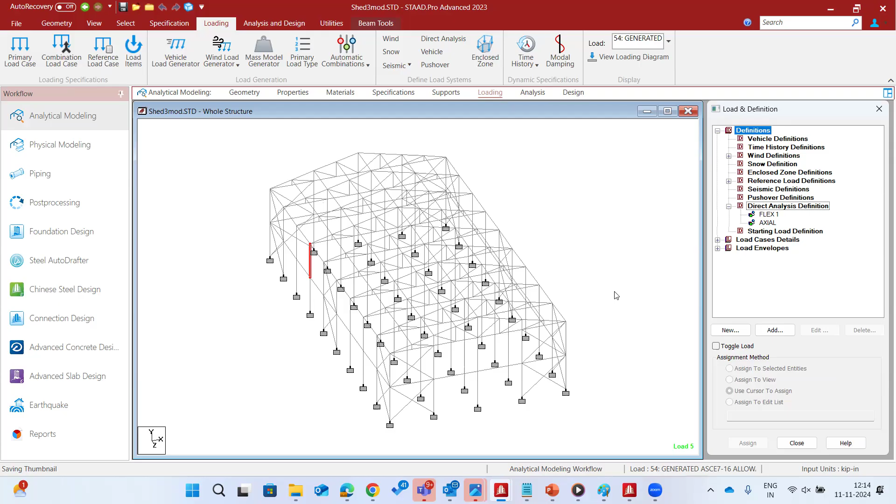But yes, we have got this. If you do this, then you needn't have to calculate the K factor - you can keep the K factor of 1. But if you want to ignore it, it's up to you. So even if you ignore it, we have recently added this effective length calculator. If you click on this, you can select the member from the list or the group.

If you want to quickly generate it, it will calculate the K factor for you, so you needn't calculate all of this manually following this nomogram. It has an inbuilt calculator because a lot of users were requesting us to include this calculation.

Okay, one more thing we have. Can you give me 5 minutes just to show you this optimization feature? This is very important, and very interesting as well. Let me go to it first.

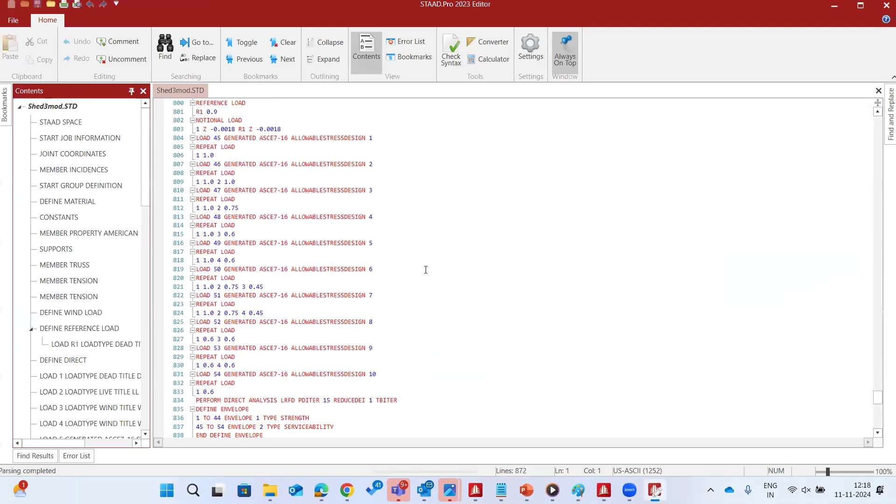Now let's see what we can do using the select command. I have already included this in this example. Before coming to that, I created this model just to show you. So instead of the check code command, I am using the select command.

Now if I run the model... Now please see here, if I run the model this time and show you this same utilization ratio table, you can see here all of them have passed.

This is my actual section, 18 by 35, and it has picked this one. For this one, it has picked a different section. That means, if I double click on this, this is my actual section 18 by 35, and this is the design section - the most optimum section it has picked, 12 by 26.

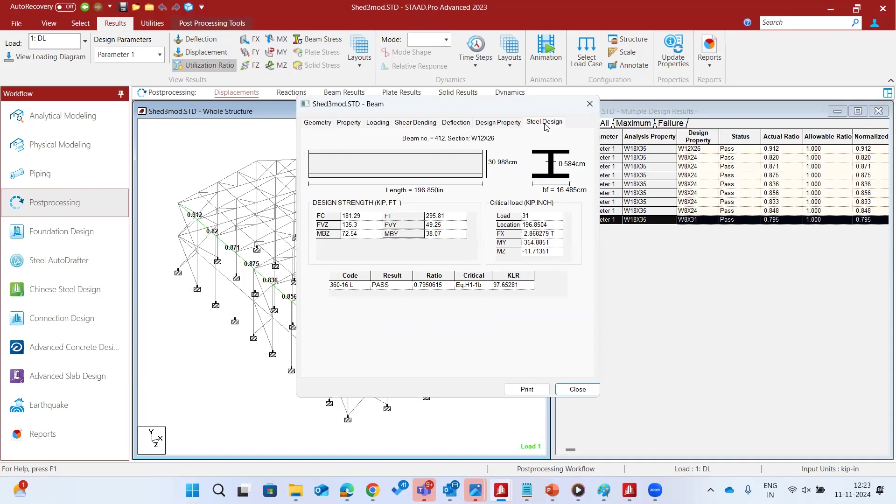Now you can put it, but again, as I mentioned before in the concrete part, is there something we need to do more after this? Because we have made a lot of changes in the section, right? We have to reanalyze it, so the stiffness is changed. So the best way is, after you have done this first set of design command, you just invoke a perform analysis command to reanalyze it. Just one step you need to do.

And you define another design parameter block. This time you needn't use the select parameter, just with the normal design ratios and other parameters, and conclude it by the check code parameter. Just to see the final design ratio with the updated demand, because we have changed the stiffness, and with that changed stiffness, we have reanalyzed, right?

Okay, let's rerun the model again. Hold on.

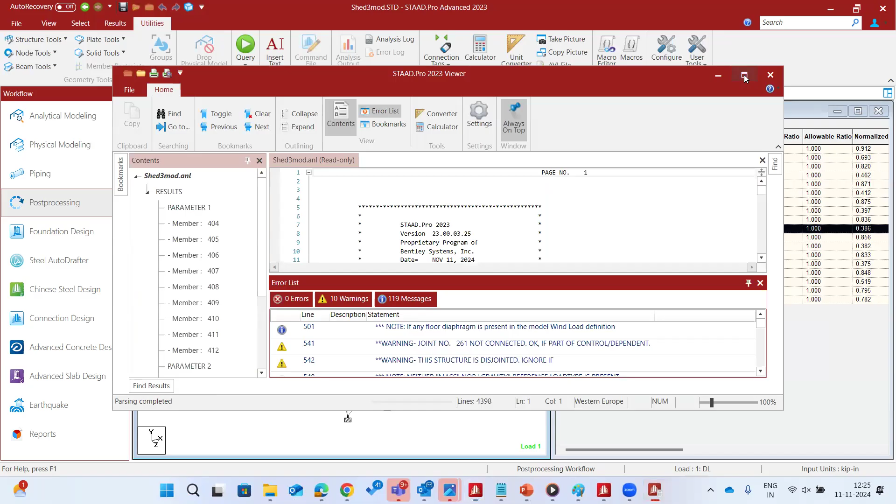So this is the way you can optimize your steel structure. And if you want to see the final design report, you can go to this output file. For example, member 408, you can see the complete calculation - serviceability, compression, slenderness check, tension, yielding, rupture, flexural buckling, flexural torsional buckling, and everything. As I mentioned for steel, honestly speaking, it does a lot of things. And also the deflection check, it will do it for you, whether it's satisfying the serviceability limit state or not. You can see the deflection check is done, actual deflection and the allowable deflection.

So once you're done with this, you can go to the RAM connection from here, and this is the connection design. And from there on, you can go to the RAM connection. I am just showing you a few of the important things. This structure I could have taken for one whole day - a lot of nitty-gritties I could have discussed, but you can understand there are a lot of things to discuss.

We see what is the node number or beam number specified in the warning note, and check whether we can understand what is the problem, then we can repass like adding. I mean, normally it is related with release or fixed support, and we make some mistake in putting a checklist check mark in some direction, or we forget to put some check, so it becomes instability.

Yes, I'm coming to that. You're almost there, somehow it's got clear. How to remove this? Every other time, yeah, it's getting very irritating. Just one more minute. Hold on.

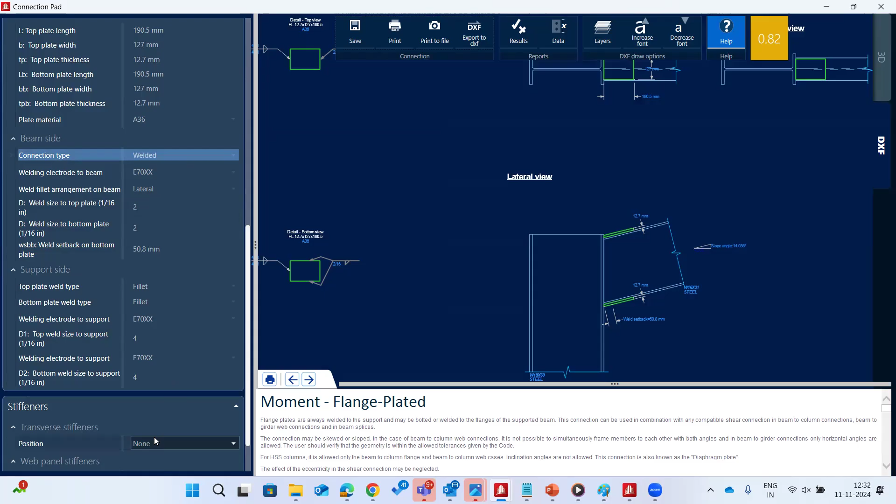And you can see the DXF file here, and export this DXF file in the drawing format. There are a lot of things you can play around with, like if you want to include the stiffener, you can add all those stiffener positions and everything. And after you are done with this...

You can get the detailed result. You can see the result, and if there is anything wrong in calculation, it will immediately show you. This color code is very important: yellow means by strength it is passing, but some of the geometric criteria is not fulfilling as per the code.

Now the good part is, apart from the standard connection, it can also do the base plate connection design. As it's directly integrated with STAAD, for example, there are hundreds of connections. You can fire all those connections together - there is a tool by which you can fire all those connections together.

For example, all beam column joints - it will select all the joints which are qualified as a beam column or BCF joint, and it will design it for you. Similar to that, we have something called smart connection.

If you use this smart connection, it will not only select the right template, but also optimize the plate thickness, welding thickness, and all. For example, I think this one was... yeah, smart connection, I can see this optimize option is there. So it's already optimized, and accordingly you can see the best ratio possible.

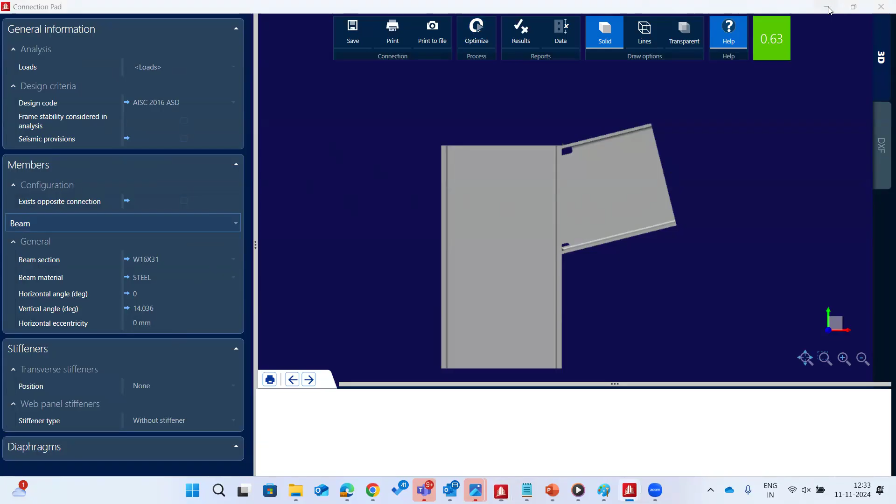Okay, now finally, there's a very important thing. Let me show this one maybe, because this is the entire workflow I'm showing. Let me close this guy first.

So you can see Steel Auto Drafter - anyone of you use this? The Steel Auto Drafter. So it comes with your package. Steel Auto Drafter is a drafting software.

The moment you click on this, it's very small, very compact. It's not that complex software, but it's very helpful. It will generate an interface like this. For example, I want to generate a drafting drawing out of this - just select the drawing direction. Say, for example, I want to see it like this from Z direction, full section, partial section, 2D section, the scale - everything you can control, and you can generate the drawing.

And this drawing is very nice, with grid lines and everything, and you can save this one in the DXF format, which can be opened in AutoCAD. Now if you think your drawing doesn't look good and you need to add a bit more information, that's fine - there is a drawing style manager you can control. You can also save it in the DXF file, and in AutoCAD you may add a little bit more information if you want. But most of the important things are all generated already.

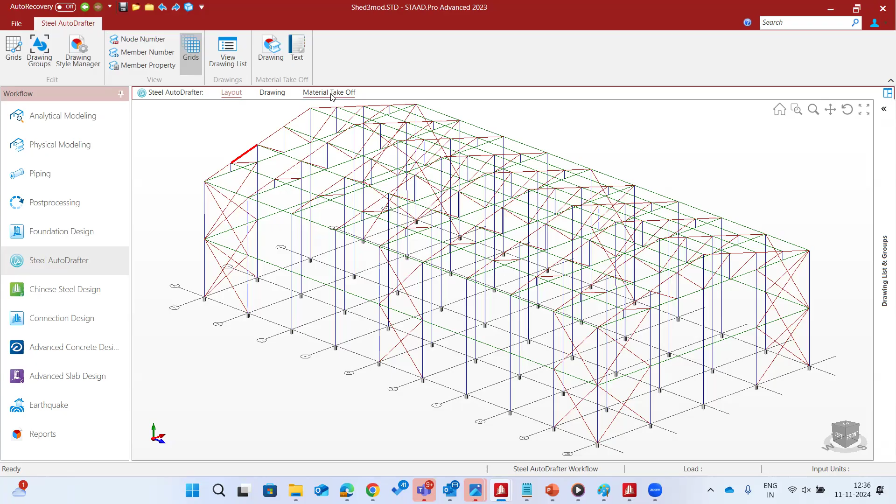So after everything, there is something called foundation design. Within this UI, you can fire this foundation design and launch this.

So there we have a lot of different options. Now I'm not going into all of them, but just to show you this isolated footing, we can design the mat footing, combined footing, everything. Now here we already have this isolated footing job created. All the support reactions, everything will be imported from STAAD.Pro.

Now here you can define the concrete property like unit weight, spacing, minimum and maximum reinforcement, everything. Soil information like SBC of soil, any factor you want to add, depth of water table, height, everything. For geometry, the program can calculate it, or you can set the geometry and ask the program to check.

For example, I'm doing the calculate geometry option. A lot of other checks you can do, sliding, overturning checks, everything you can do. But right now, I'm just firing the design. Now it will do a very rigorous design.

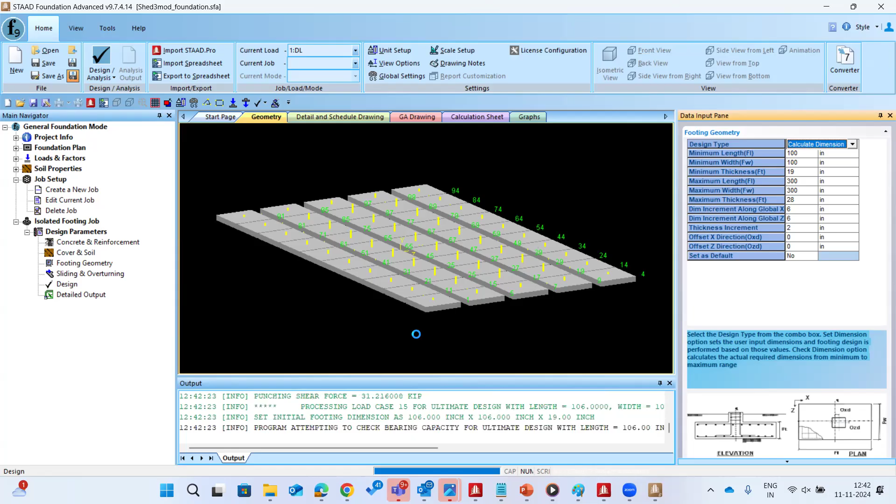A lot of users come back saying, if it's isolated and generally smaller, for simplicity of calculation we consider it rigid. But in some cases, we notice users come up with dimensions expecting some internal bending, like a flexible foundation. So we generally advise them to go to the mat foundation job and model with plate elements. That's why in the newest version we will give the option to directly choose rigid or mat in the isolated foundation module. The program will automatically calculate the mat foundation if you selected flexible. Okay, any question?

So, Pak, I want to ask a general question. What is the newest, most advanced part of STAAD.Pro? STAAD.Pro is STAAD.Pro 2024, the 2024 version. What is the most advanced compared with other software, maybe like subdivision or comparing with other software?

I can't compare with other software because it's beyond my policy to compare with other software. But what I can do is tell you what is the best part in STAAD.Pro. First of all, the best part is having the integration, because it integrates all the software that we have. I showed you this at the very beginning.

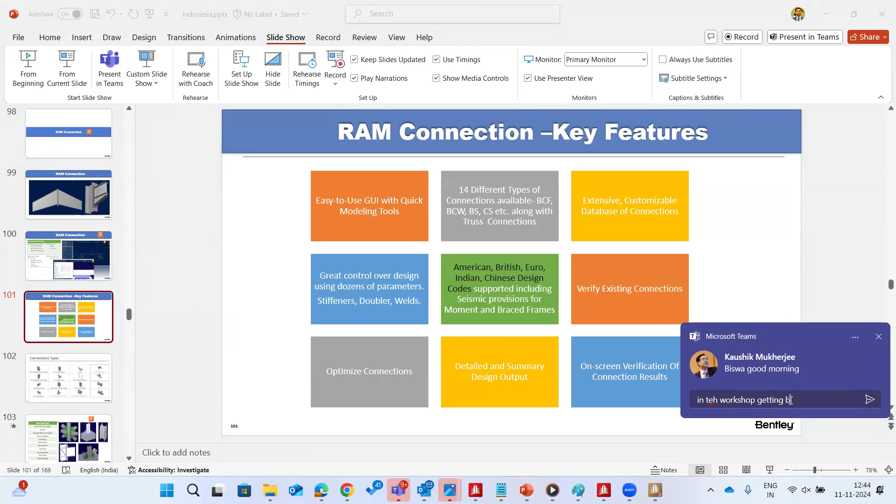Okay, let me show you before I wind up, a very interesting thing. Let me show you. It's ADINA.

This is one of the most advanced things, it's called ADINA integration. Do you know ADINA? Let me give you some peek into this. ADINA was recently procured, not 2 or 3 years back. It was developed by the most stalwart figure in the finite element industry. He has his own book, Klaus-Jurgen Bathe. He is now our Bentley consultant because we have procured it. He developed it at MIT back in 1986.

Anything that you can say STAAD can't do, every software has got its own yardstick, but with this ADINA solver, the options are limitless. Why am I telling you so? So you can simulate anything, any kind of structure or situation, be it structural, thermal, CFD, or electromagnetism, it doesn't matter.

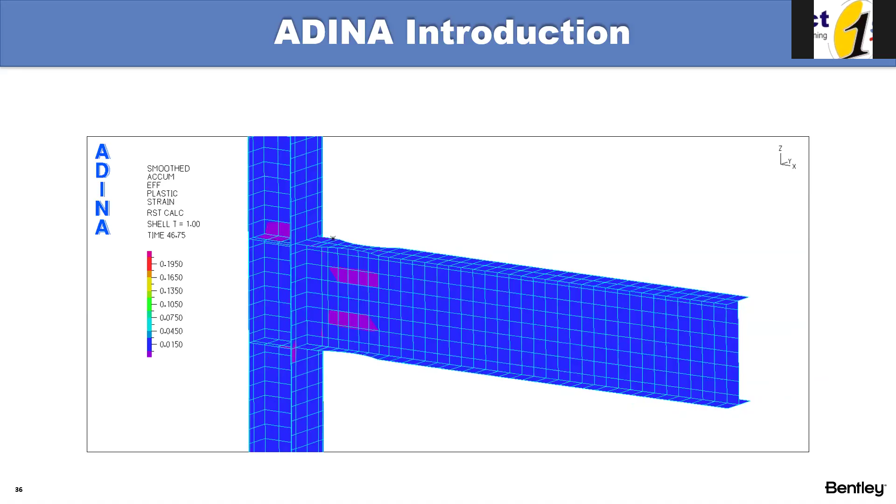For example, crash simulation. Instead, we can also do buckling analysis, but it has got some advanced capabilities. For example, if there is fatigue, or you want to simulate a cyclic seismic load, we can model it and you can see the permanent plastic deformation develop, inelastic deformation. You can simulate the same thing in ADINA.

Crash buckling will be a separate package, yeah, separate package, but it has got integration with that. Good news, maybe, I'm not sure, there is talk that it is supposed to be included in the near future, within this year only. I can't promise the date because management is still working on this worksheet. Once it is available...

So it is a higher than advanced package. Higher means pricing? Yeah, pricing, but I can't say the pricing, they can say. Let me show you one thing. See, it has not yet been officially included, but there is a plan, yes, there's a plan. So just keep you updated on this, it is very shortly coming.

Why is it so? Because, for example, imagine a retaining tank with water, it is moving and sloshing effect is there. The hydrodynamic effects we can't directly do, but there is some indirect way like convective and impulsive components, we have to divide into two different static components and we can do it. In ADINA, we can solve it directly.

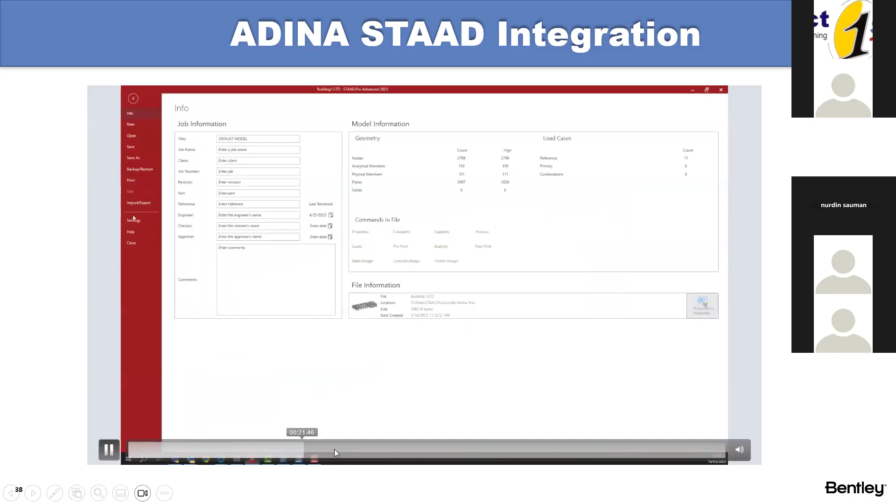Now, for example, this is the structure. You can see we have done it in the physical modeler. I'm just quickly going through this. If you go to physical modeler and export, you can see a small little tab there, ADINA. You can also see there, you can take it to ADINA. So in ADINA, the sky is limitless there.

So this is the market leader in FE analysis. It's only competed with, I should not name any other software, like ANSYS or Abaqus or others, but it's a university product. Remember this, it was developed at MIT specifically for research purposes. And the good news is we would be using its solver in the recent time. So that's the beauty here.

And another powerful thing, let me tell you, did you come across this one, advanced floor load? Did I show you this? Have you come across this?

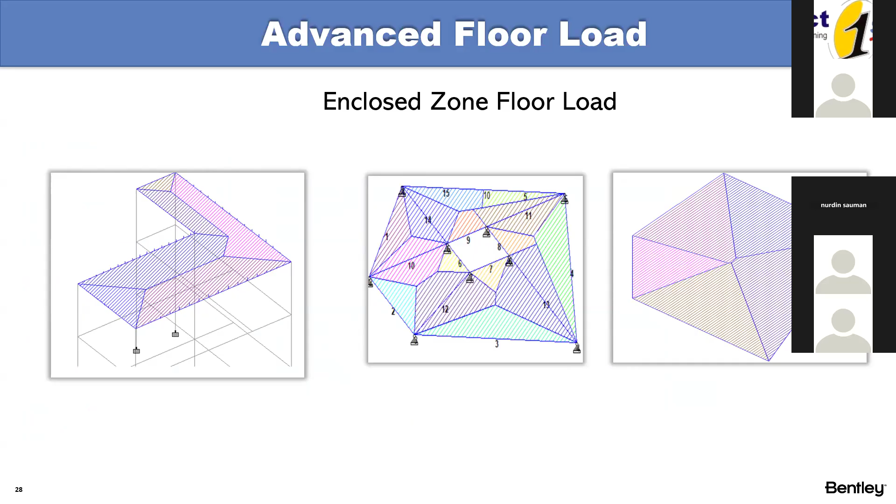Let me tell you, this has been available since V2023 onwards. I know many of you are not using it. It is already there in the load case as enclosed floor load. For example, you have this type of floor panel with two cantilever beams which have no terminal support. Should you apply floor load on this in normal STAAD? It won't allow you because you don't have a well-defined boundary. But right now in V2023, we can do it just like this.

We have been developing this leaps and bounds recently. Let me show a very interesting example. In the pre-V2023 version, you would get some garbage floor load distribution like this if there is any kind of panel which is not subdivided into two different parts. But right now we can do it. Is this using ADINA? No, it's a normal one. I've shown the ADINA one in V2023, the latest one.

Okay, now let me show you another one with ADINA, because I recently did a seminar on this, on solar structure. Some of us may think, okay, solar structure looks very simple, but we have noticed that in a few cases these are very complex. So many files are opened. So it's my structure.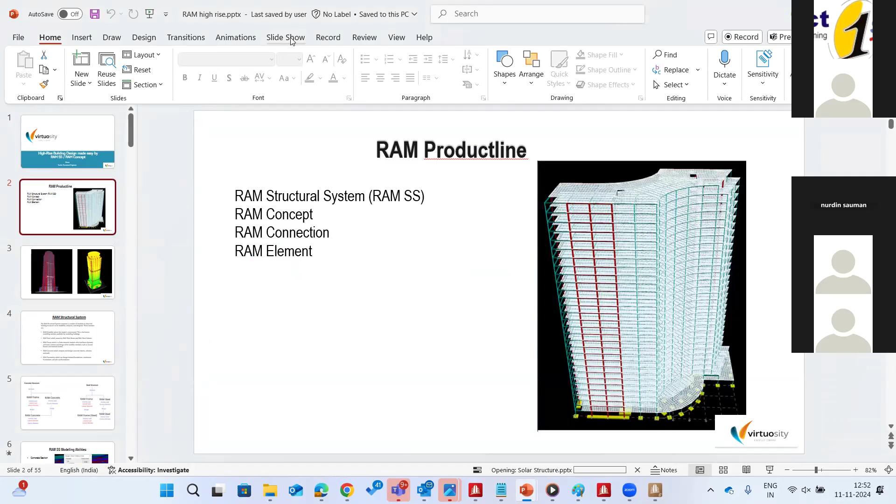And finally, we have RAM structural system, which is also part of this structural suite, but it is not linked with STAAD because it's meant entirely for tall buildings, just like ETABS. STAAD is there, but it is meant for tall buildings too. Let me quickly give you some insights because it's a completely different software. If you're into tall buildings, you can use it.

The reason being, here you can model directly by floor system. Just define the floor geometry, define the floor height, and a complete physical model will be quickly generated. It also has different types of ready floor diagrams you can directly define.

Rigid, composite, composite deck - if any of you are using these for your structure, you can use RAM structural system. We have a very good implementation for composite deck.

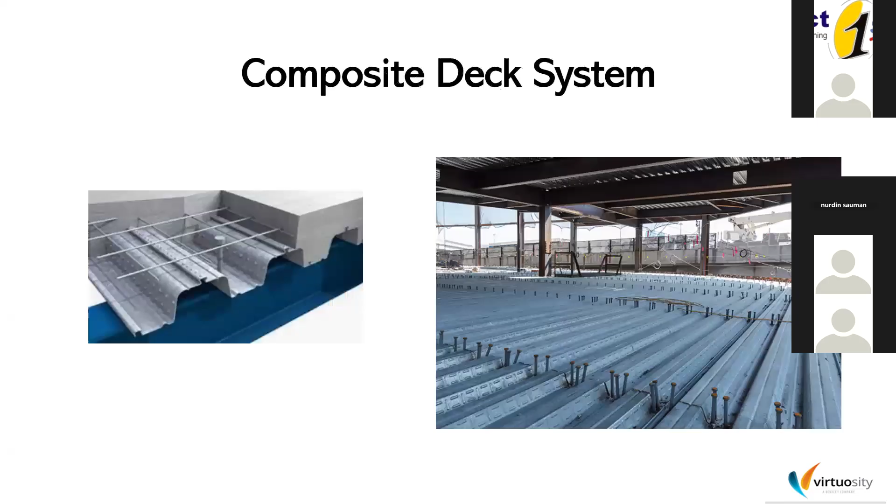Buckling restrained brace frames for seismic resistant structures - we have different kinds of libraries for this. Buckling restrained brace frame with the core brace - we have something like this which will yield internally, unlike a conventional bracing where you can expect some unpredicted buckling.

And it has construction stage analysis, so that every floor is constructed at a different time. Both the geometric and time-dependent effects are not the same, like creep and shrinkage, for the top floor versus the first floor. That's the reason we need to evaluate the construction sequence and its impact on your structure. If you don't do that, you might end up with column shortening effects, and this might impact your non-structural element failure.

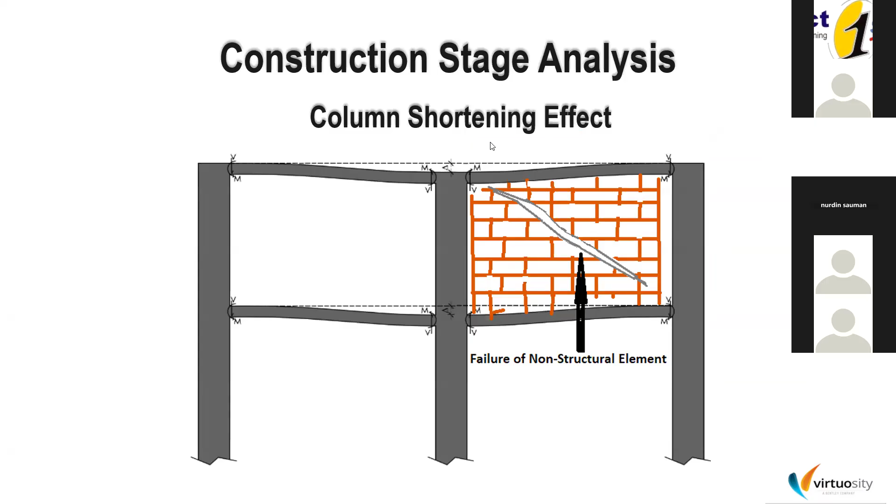One-click wind load generator - it's mostly in STAAD, but for tall buildings it is much more advanced in terms of performing the analysis and quick modeling. P-Delta analysis along with response spectrum - we can also do this in STAAD. Here also we are doing the same kind of analysis; we can do it there.

Wind tunnel test results, if you have them, you can feed them in. So in short, it is meant for tall buildings - you can feed all those simulations here. And it has an interactive physical model you can see. It is somewhere in the Middle East, and that heavy model was modeled in the system.

Okay, I have so many things with me, but I need to know what exactly you would want to understand. Sure.

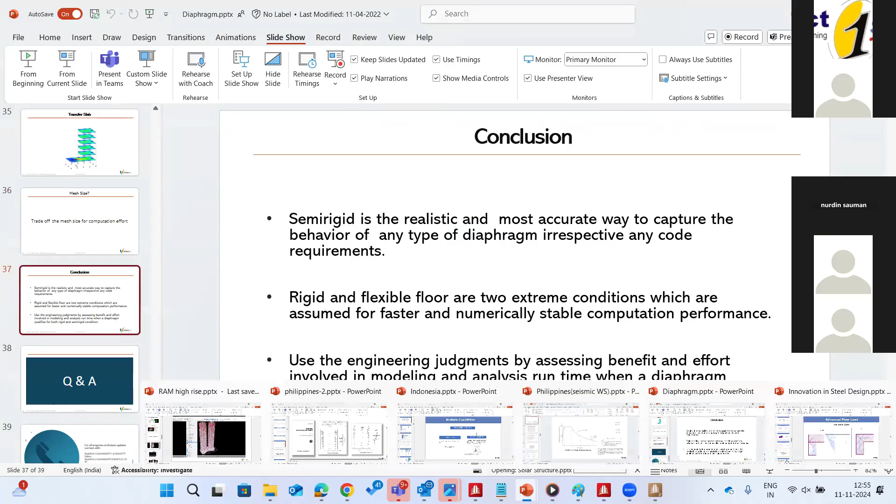I had one question regarding slab. How do we know that the working shear is already below the concrete shear capacity, or slab shear concrete capacity?

Very good question. This is one of the questions we used to face in our technical support days. In the staad output, it comes out as a stress, not as a force. I'm going to show this. Say for example, here's the column, landing here, and you want to see in this region, doing punching, whether my total force is passing the capacity or not. You are right that it doesn't give you the force, what it gives is stress. Now, there is a way to do that.

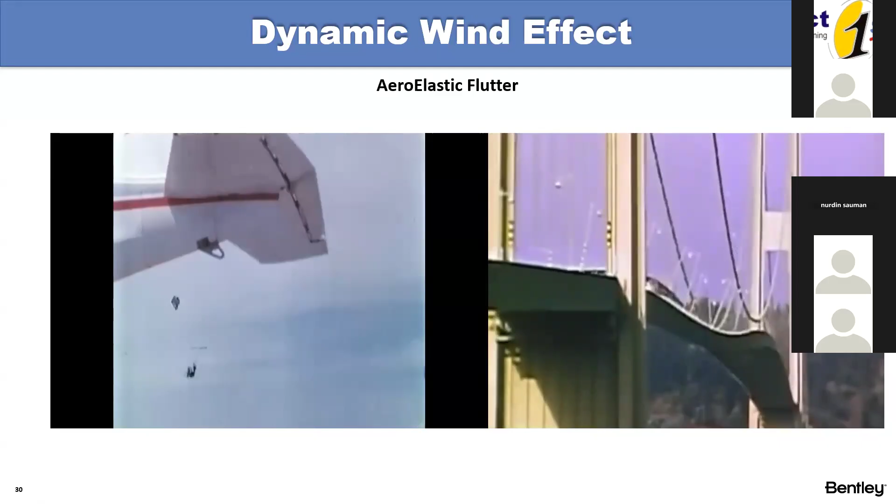Now in ADINA we do have this. In fact, the code says, taking it from the Indian code, if your structure is subjected to wind load and there is a phenomena too complex to justify generalization of wind forces produced by interference, it can only be ascertained by detailed wind tunnel or CFD study. The code specifically says that.

This is ADINA for you. You can see, you can simulate the wind flow even if it is not laminar. You have seen this turbulence index and all this. These are some advanced things on CFD, but yes, we did one webinar on this where we nicely tried to simulate fluid structure interaction.

Okay, so anything else? Yes madam, any question? I think she wants to ask but could not communicate with me. Anything? In your own language you can ask her, she can interpret.

So, did you find it useful or helpful in using STAAD.Pro? As a new user, is it easy or is it difficult?

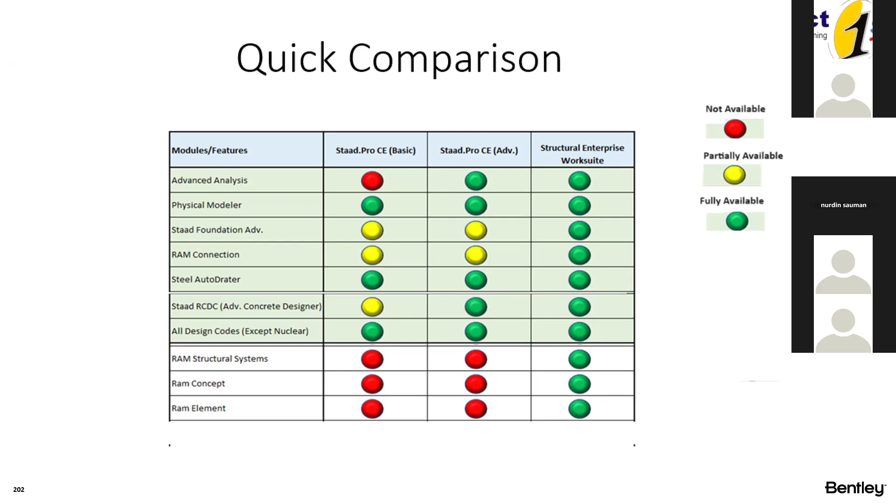Okay, so something else. If you want to see the type of industry that we are using, let me just conclude.

This is a metro station building, underground metro station building embedded inside the station, deep underground. This is for Delhi Metro. I visited their office in New Delhi back in 2019. Huge structure, it looks simple. When it opens, it takes several minutes to open it. So they have to model all the soil structure interaction, compression-only springs, then hydrostatic load, everything.

Industrial structure. These are user models, okay, not that I have created. Silo and bunker, heavy footing model with the solid element. Liquid and water retaining structures. These are the liquid and water retaining structures.

Transportation. Flyover plate girder. Box girder. Dam. Wind turbine foundation, this is modeled with plate elements.

So you could see we are not sticking to a single type of structure. Options are limitless, you just need to know how to play around. For this, you might need some training maybe. Those who are expert, that's fine. Those who are new, just to let you know, after you procure the product we will deliver complimentary training for this, depending on your requirement. If you're new, in the building industry, we'll understand your requirement and prepare the course for you. So no need to worry like you have procured it and we are just running away. It's not like that. We are there for supporting you, training you, everything.

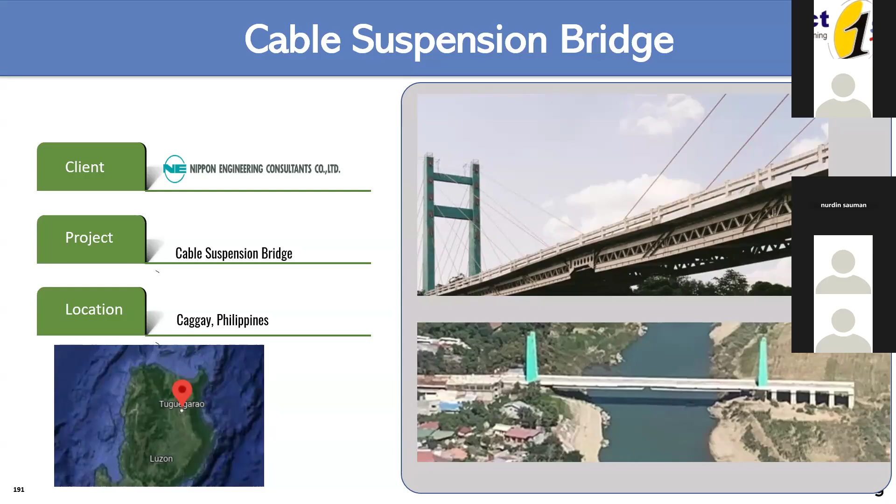Foot and over bridge. This is a bridge in the Philippines. The user sent me this just to evaluate the existing bridge. They have sent some of that information. And this you can see the bridge, and this is in the STAAD model. The cable stayed bridge model with the advanced cable analysis.

Okay, friends. Questions they have. We are till this.

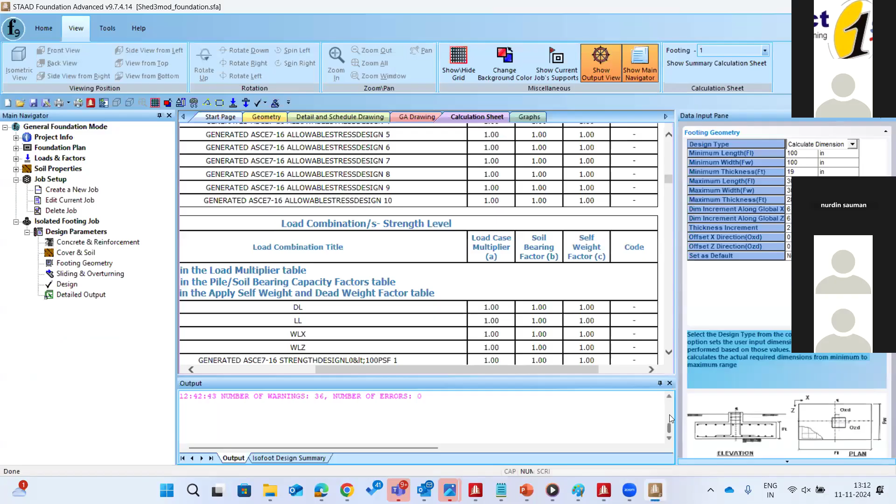In cover and soil parameter, so yes, there is the maximum percentage of contact, in ultimate loads, yes. When will it be used? Not maximum, it is minimum. Sorry, the minimum, yes, that's what I have mentioned to you.

Say for example you have a footing like this, and due to this overturning effect, this loses contact. Now in some cases, a lot of users can compromise with this contact loss, they may say okay, 2% contact loss, I'm okay with that. Because you can't say that 100% should be in contact, in some cases there will be slightest contact loss. So you can ask the program that, okay, I can allow 5% contact loss, beyond that if it does, please throw an error message that the design has failed. That percentage you can define, that limit you can allow.

So the difference between service load and ultimate loads is only the load combination. Yes, exactly. One is for designing and one is for just sizing.

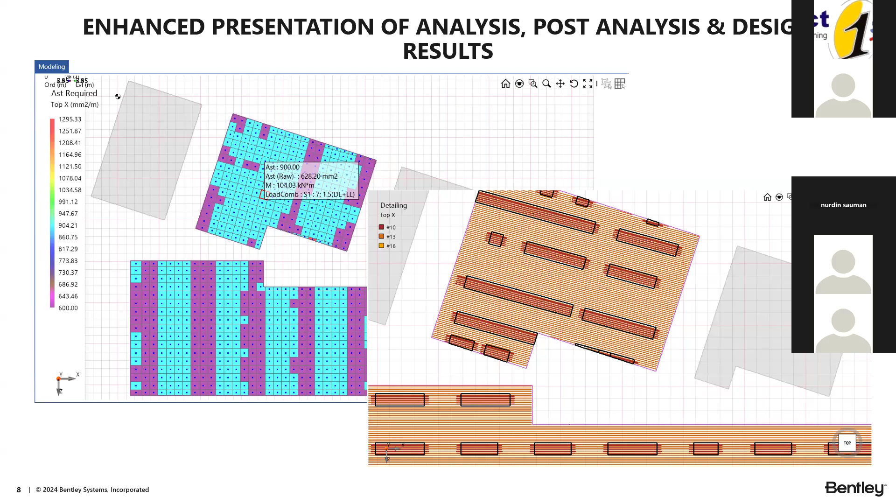In 2023 we didn't have the isolated footing, in 2024 we have it. And the best part here is the rendering, detailing, analysis options, it's a different level. Even if you have different orientation of mat, you can design, not only design but optimize. We didn't have any optimization routine for mat in the previous version, but here we can optimize the mat foundation also, steel and all, with live reporting - design optimization, that's what I mean.

I tried using this version 2023 but I cannot create the pedestal. No, we do have this pedestal option. In release note it was that the pedestal can only be edited, not created. Edit means if you have imported it from STAAD, yes, but we cannot create it. No, in the recent version 2024 we are giving the option to create it also. But pedestal is there, it is not like the pedestal was not there.

That's the reason I'm repeatedly telling you, just try to explore this one, and next week or so it should be released - 2024, this is 2024. If you need more kind of demonstration on this, please let me know. We have our product manager also, he can link with your team on some specific things of your requirement.

Now, modeling rectangular isolated footing, that's the one you mentioned. Isolated footing we can model and design with the flexible and rigid method. Yes, analysis, see, this is the one.

A lot of different UI and interpretation, illustration we have improved. Because it's not released yet, I don't have the option to explore it in depth. So once it releases, let me see.

Luar biasa, keren. From the back I can't hear anything from you. Maybe we should do this next. They are following because they already know a lot of things.